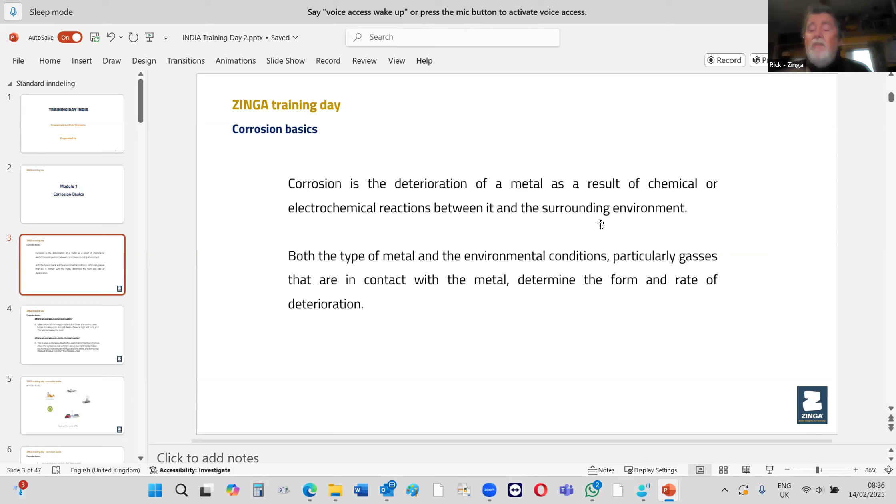That never changes. In the atmosphere, you have a lot of carbon dioxide, millions of tons. This carbon dioxide dissolves in your overnight condensation and in your rain. It makes carbonic acid, and this is what attacks your steel. So if it's not painted or galvanized with Zinga or galvanizing, it is going to corrode. When it's corroding, little molecules of metal are actually dissolving into the water, and that's assisted by the carbonation from the gases. So that's very basically what it is.

Another good example for you is chimneys. All over the world, you see chimneys, especially when you're making steel and so on. They produce sulfur smoke. When you have rain coming down and overnight condensation, sulfur smoke dissolves into that water and makes sulfuric acid. So that's also what eats your steel.

I had a guy phone me up a couple of years ago and he said, we have corrosion all over our bridge after only 12 years. Can Zinga work? I said, yes. He says, you don't understand. There was some paint damage from a truck. It took off the paint and it started corroding. I said, yeah, it's your salts. He says, no, we're more than 200 kilometers from the sea.

I said, you know the air you breathe? It's mostly nitrogen. Like sulfur and carbon dioxide, nitrogen dissolves in the rain or the condensation, and it produces nitric acid, which is a form of salts. So he was quite amazed, and I said, it doesn't matter where you are, you're going to have water and you're going to have salt forming, and the salt is going to attack your steelwork. It's as simple as that. And it's also two different steels, but we'll cover that as galvanic protection.

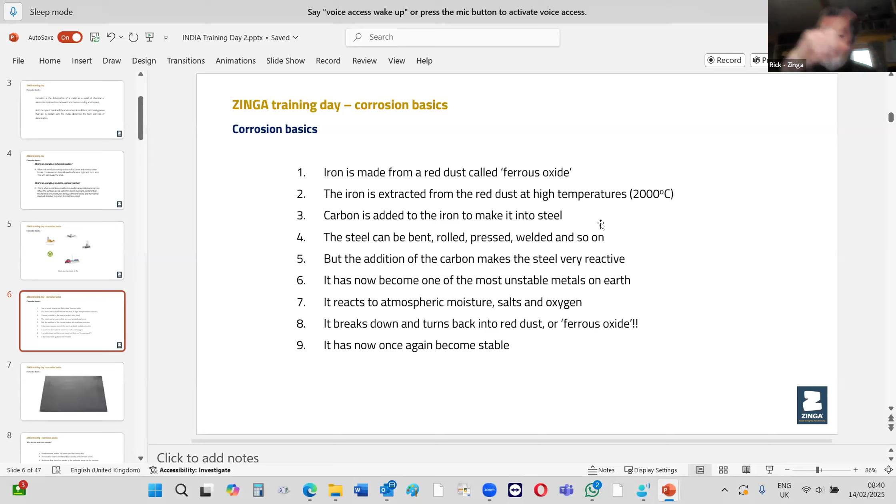So to break the cycle, that's why people put paint, or in our case, we put Zinga. And other guys put hot dip galvanizing. It breaks the circle of life of the steel and makes it last that much longer.

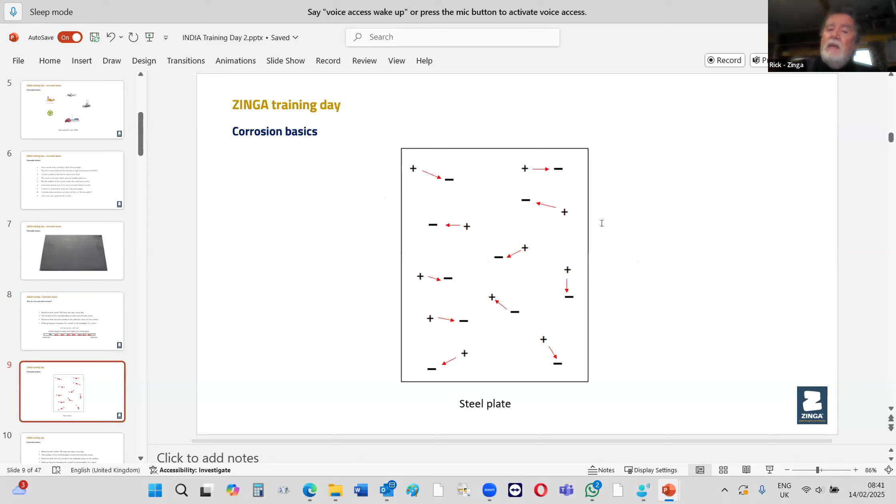So I'm just showing you here in a basic diagram. All your little electrical charges are flowing from the anodic area through the steel, and they stop. And this is how it looks. If you could see that steel plate through a special microscope, you would see these little charges. So all the plus signs is where your carbon is in the steel and in cast iron as well. A lot of carbon in that. And it's just flowing and stops.

Sorry, this will be repeated. So I'm just showing you that cycle in the steel. It's like if you have a battery to a light bulb, and you undo one of the wires, the light bulb will not come on because there's no circuit.

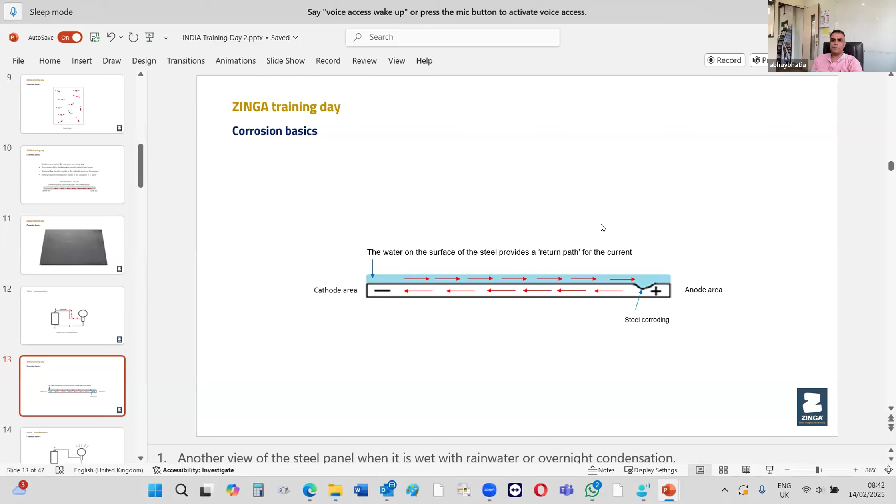As soon as you put water on steel, any water, like I said, rain, overnight condensation, now you have a circuit, because the electrons are going to flow from the positive area to the negative as normal. Then they're going to flow back to the positive through the water. And there's your circuit, and that's called a corrosion circuit. So this happens because the water acts like a return path for the current to flow, right?

Yes, exactly. So in scientific terms, the little charges going through the steel are just called electrons, but when they flow through the water, they're called ions, but it's still an electrical charge, and that is your corrosion cell. And this is what Zinga breaks, but we'll show you that in a sec.

So what happens when you see steel? Anywhere you have the positive area and the electrons are flowing away from it, it just starts to deplete and form pits. And you see little bits of pitting all over the steel surface as these little areas develop.

So when we put Zinga on, the top plate is showing you the steel as it is, just an empty steel plate. But see underneath, that gray color, that's the Zinga layer. And automatically, the current flows from the Zinga into the steel. So the entire Zinga area becomes active. That's a big layer of plus signs, positive.

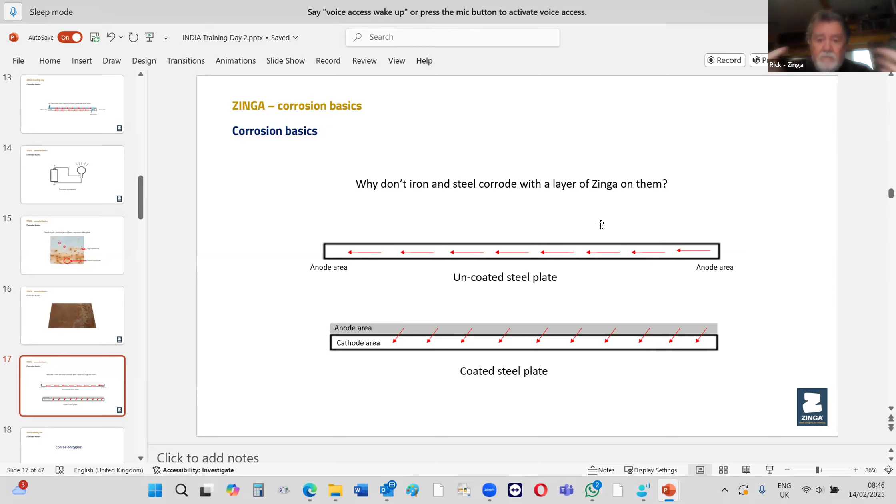And that's why the pitting goes deeper and deeper, which often you see on pipes, water pipes, pipes in oil refineries. When they start pitting, then you know it can be dangerous, because after a certain point, it's going to eat a hole right through the pipe, and then you've got oil, gas, water, whatever coming out. So pitting is the one you've got to keep an eye on.

Again, galvanic corrosion. That's literally how Zinga works, and hot dip galvanizing and so on. Whereas one metal will corrode in favor of the other metal because of all the electrons flowing out of it. Then you've got fretting, filiform, stress, and so on. But let me show you.

So this is the common one. And as I just showed you, you develop little rust spots all over the surface. And because it's general and the entire surface area is exposed, it'll all corrode evenly at the same time. So this is general corrosion.

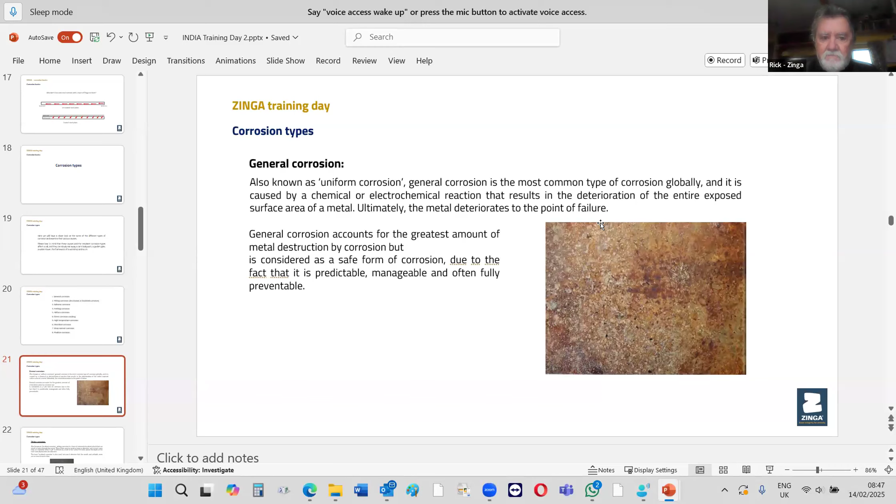With pitting corrosion or localized corrosion, like I said, this happens in a very small area. So your plus and minus signs are very close. So your circuit is very small and concentrated. So all the energy is going into that one area and it starts to dissolve the metal out.

And for example, you'll see often on pipelines, tanks and so on, if they've had damage or the paint has just broken down with age, because all paints break down, okay? There's no such thing as a perfect paint. The ultraviolet is the main culprit. Once ultraviolet starts hammering onto a paint system, you can normally tell when it's breaking down, because the first thing you see, it goes a little bit matte and so on. Then it starts to flake off back towards the primer and back towards the metal.

And what happens with pitting, the paint will break away in a small area, and that area is where all the water goes from your overnight condensation or whatever. And that's why that area starts pitting and it goes in very, very deep. And that's why we say on pipelines and so on, if you've only got small areas of pitting and the customer doesn't want to spend thousands and thousands of dollars, if you have a bristle blaster or something and just treat the area where the pitting is, brush on Zinga, that'll fix it for the next 10, 15, 20 years, depending on how thick the zinc is.

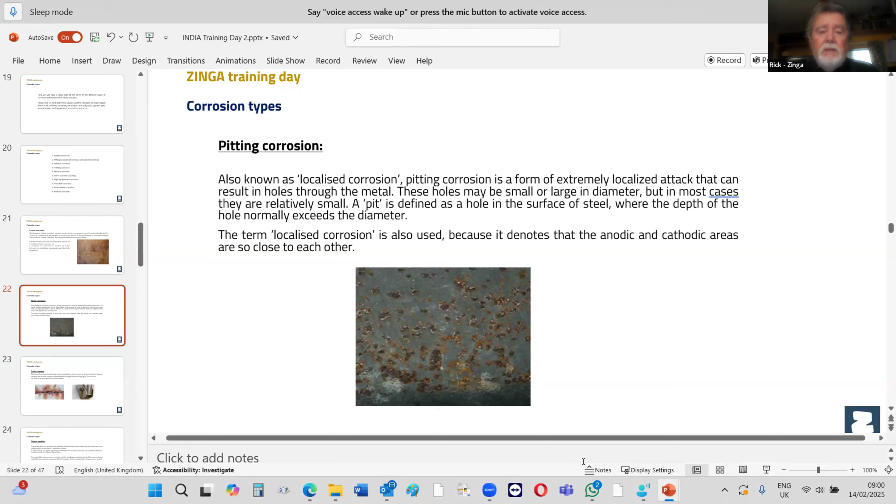Okay, that's pitting corrosion. This is another very common one, crevice corrosion. Anywhere you have bolted joints, two plates bolted together on a bridge or whatever, and even between the nut on bolted plates, anywhere you have two pieces of metal together, you're going to have water going in between the plates from rain, overnight condensation. This moisture is always there. It goes in between the two plates, and deeper down there's no oxygen, and believe it or not, that turns the moisture acidic, so your pH starts to drop.

And even if they're painted and it's old and starting to break down with age, that acidic water will go inside, start corroding, and it starts swelling up with rust. We've seen on transmission towers, which they make from angle iron, where it's actually buckled the angle iron. It's pushed it out so much, it's twisted the plate from the pressure of the rust. It's incredible. And of course, the bolts inside these bolted joints just rot through. You hit it with a hammer, the whole thing comes apart.

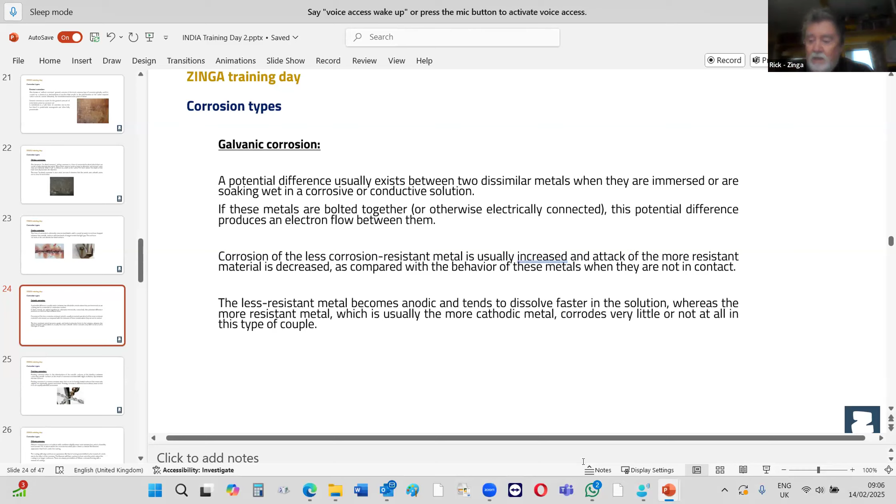And it's the same in boats. On boats under the water, they put zinc anodes or aluminium anodes, but you've got a stainless steel prop shaft to the propeller. The propeller is often made of brass or stainless or bronze. And I said to the guys, whether it's atmospheric or underwater, you must not have a metallic cocktail, as we call it. Because in a metallic cocktail, all the metals that are more active are going to dissolve and disappear. So you've got to have the same metals always on any job.

Filiform corrosion is not so common, but if you see it, this normally happens when you put on a very thin layer of paint, especially oil-based paints. In Africa, we use them to paint our window frames, doors, and all that. And it's normally an oil base. Even an unbroken coating of oil paint allows corrosion to form underneath, believe it or not. So filiform corrosion, that's a little telltale sign.

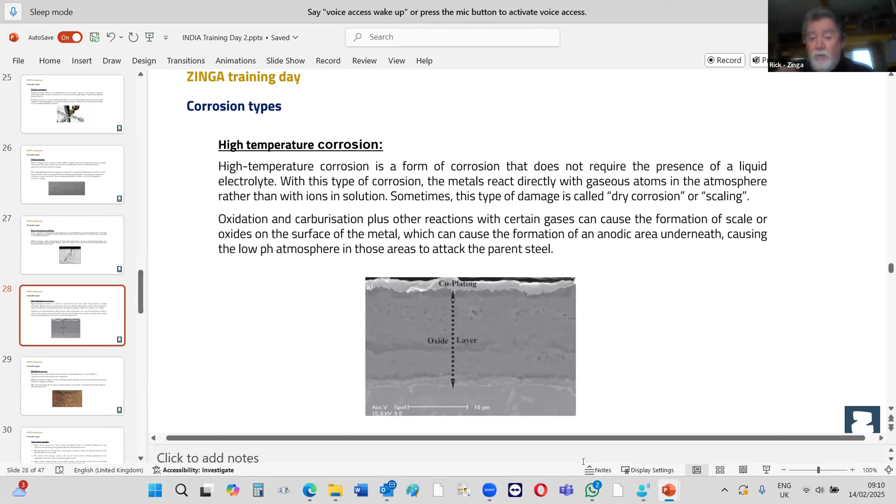You do have reactions where the atmosphere is normal, so carbon dioxide forming carbonic acid, but the heat also carbonizes a lot of fumes, and these go inside the metal, and then it starts to striate, it splits, and it starts peeling off. They call that scaling. So when we put Aqua Zinga on top and seal it all, it stops any reactions from moisture or from the gases taking place. So we have a solution for virtually all of these.

Microbial corrosion: the first big project we did was in Killybegs in 1999. They had 312 pier legs. It's the biggest pier in Ireland, and the ships come in and unload their fish on that pier, and these 312 legs support a concrete deck, and on that deck is a big fish processing factory. Ships from Russia and Finland come in every Friday, load up with fish and disappear.

So I was called in and they said, look, for this factory and these legs, we were told it's a 50-year design life. Each leg's wall thickness was 40 millimeters, and we x-rayed many legs, and it's down to 16 millimeters from 40 after only 20 years. So from 40 mm to 16 mm? Yeah, from 40 down to 16.

And I said to them, you see, the water is a bit shiny. He said, yes. I said, I think the fish factories may be putting some of their scraps in the water in the harbor. They said no, they assured us that they get rid of it biologically and use it for cattle feed. I said, you see that water? It looks like a kaleidoscope, greens and blues and purples. That's oil.

You are right, because you know how I made this quiz? I went on ChatGPT. I uploaded a PDF. I said, give me a challenging multi-choice question using this data sheet. I just copied what is there. Good one, good one. Okay. So good. So 6 questions. Now, Rick, do you want to review what questions we asked and give them the answers? Sorry, Abhay? So you want to just see what questions we asked.

We asked them what is the primary function of Zinga, and there were 4 options. And the answer is B, obviously, cathodic protection. Next question is what is the zinc content in the dry film? The answer is above 96% ideally. It's usually more than 96. Third was a little tricky. Which standard does Zinga conform to for zinc purity? So we got some answers as 14001. But the actual answer is ASTM A780, right?

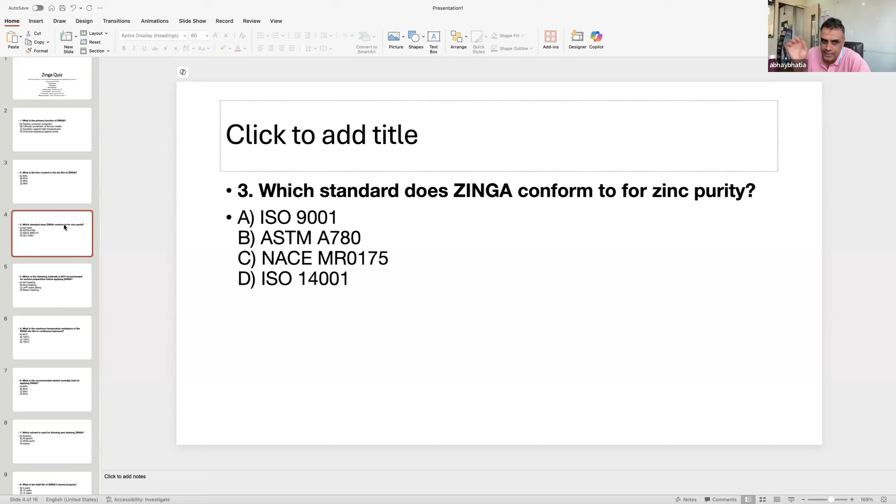Yeah, because this gets very confusing, because we are having some ISO standards, so they confuse 14001 with 12944. 12944 is the corrosion area standard. It's not related to zinc purity. Zinc purity is ASTM A780. Fourth is, okay, Rick, you want to talk about this one a bit, which of the following methods is not recommended for surface preparation before applying?

Yeah, shot blasting. Yes. And why is it not recommended? There's a couple of reasons. With shot blasting, many automatic machines use metallic shot, which is round, like the buckshot from a shotgun. So they should look like small ball bearings. And shot blasting is okay for breaking mill scale and stuff off new metal because it shatters it, and it stops it from coming loose after a year or so once it's removed.

But shot blasting gives you a surface like a golf ball. So instead of being sharp, jagged peaks where the coating can grip, it's all smooth. So it has no lateral support at all, and your adhesion is very low. So your pull-off strength is also very, very low. So we never ever put anything over a shot blasted surface. It's very bad. Got it.

Then one question we asked was: what is the maximum temperature resistance of Zinga dry film in continuous exposure? So it's actually 120 degrees with spikes of 150, right? That's correct. Just so you know, when they decontaminate nuclear steelwork that's been coated with Zinga, they use superheated steam at 150 centigrade on the jets to decontaminate the Zinga surface. So, yeah. Great.

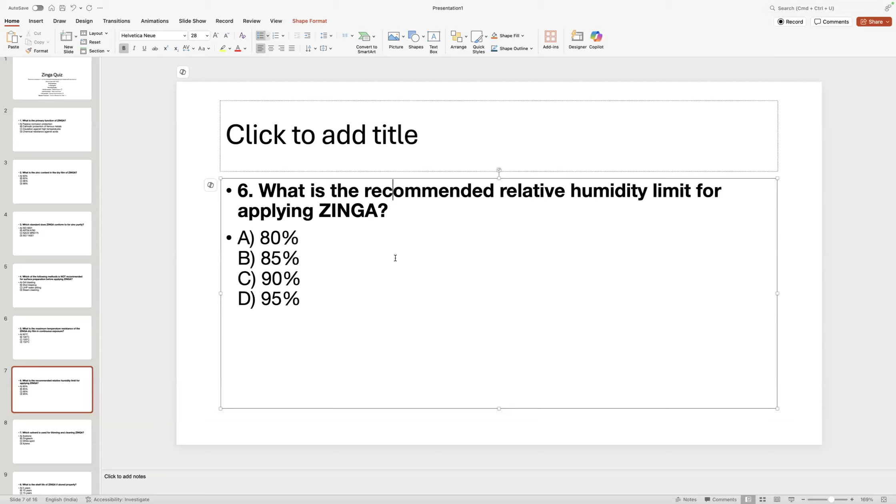And then I asked one more question where Nehul pointed out what the question should be: what is the maximum relative humidity limit for applying Zinga? And Nehul, what was your answer for this? 95%. 95. Yeah, so is that correct, Rick? It is indeed, yeah. So good.

So this is part one of the session. Now, Rick, over to you. I think you have finished the types of corrosion so far, right? Yeah, there's a couple left, but if you've seen enough about corrosion, we can go on to the metal preparation. Yeah, let's do the metal preparation.

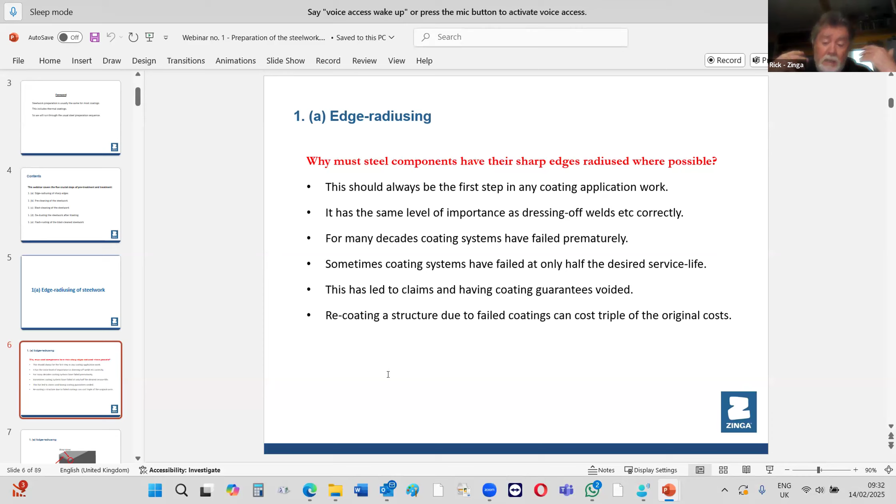It's the same importance also for dressing off welds with weld spatter and so on. So all these coating systems have failed prematurely, and many have only failed at half. So if we said this is a 40-year life and they don't do the preparation correctly, at 20 years it fails. And then there's big costs involved, and recoating will be triple the cost.

Then just take an angle grinder with a sanding disc. Not a grinding disc, that makes a mess. You just take a sanding disc, something like a 40 grit or a 36 grit disc, run it along the sharp edge, down that edge, down that edge. It takes literally 20 seconds, and you have a nice radius. Internationally, they look at 2 millimeters or 3 millimeters. 2 millimeters is fine. So on a cut edge, you still treat that before you do any blasting or pre-cleaning.

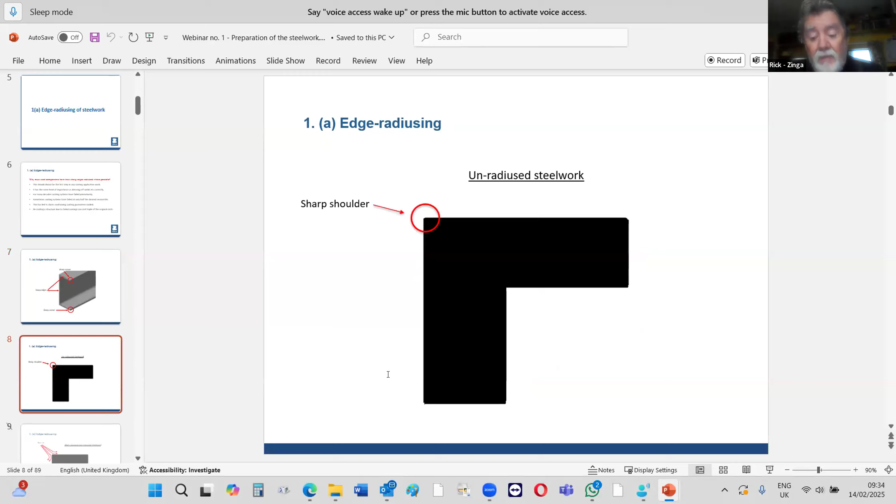That's vital. So this is just to show you, that's the sharp shoulder, and that's where the coating will pull back on either side of that sharp edge. And again, that's natural, that's the laws of physics with materials. And also when you're trying to blast it, you can split the blast. So you might have an area that's slightly smoother along the edge of the beam, which you don't want.

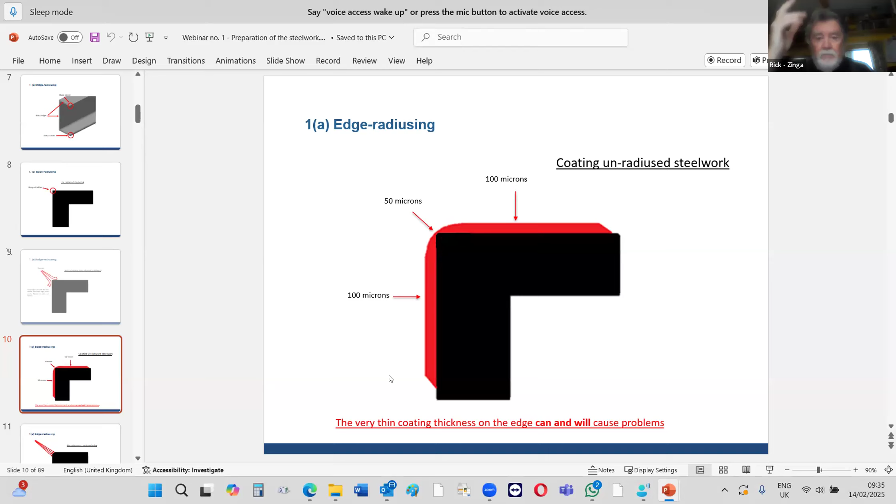So you can see here what happens. The coatings pull back, and it's roughly 50 to 60 microns maximum you'll get on a sharp edge. And that area will break down very quick from UV. And in the case of Zinga, if there's any other influences around, any adjacent metals, that thin area can deplete quicker than the rest. So the 100 microns might give you a good 30 years, depending on where you are. But the edge, you probably only get 15, 20 years, and then you're going to have to redo it.

So, Rick, this is a very true case. We are doing heavy fabrication. We have seen that on channels and angles at the edges always, because they are using spray paint. The coating does not flow enough, it does not disperse enough. And if it's going to be sharp, it will never be uniform. So some radiusing is always preferred, and applying with a brush is recommended at the corners.

Yeah, absolutely. So that's opening up the edge now. It's much easier to profile a radiused edge. It's very easy, in fact. And coating as well, it makes a big difference. If you have a radiused edge, then your coating thickness is consistent around the entire edge. And on big projects, when you're coating beams, especially at height, access is expensive. You've got to put up scaffolding, or use a hydraulic lifter to go up. And the repairs often can cost 3 times as much.

So we said to the guys, rather get it right first time, and you won't have any problems, instead of throwing away thousands and thousands of rupees because you've got to go back and redo. So it's these simple things, but they're critical. And as long as you respect that sequence, you'll never, ever have a problem.

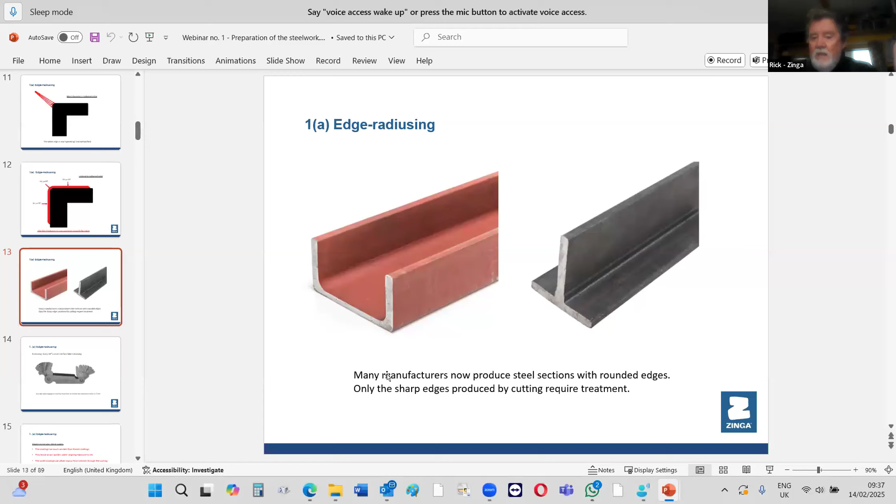Now, this is showing you a different steel supplier, and you can see it's already pre-radiused when you buy it. So there's a channel iron and there's a T section, and they're ready to be blast cleaned and put Zinga on, and they're perfect. They don't need anything, apart from the cut ends where you just give it a quick dressing off. Takes 30 seconds and away you go.

No problem. It's so critical, inspectors even have this radius gauge, and they can check it. If it doesn't fit, they'll call you back and say you must take your sanding disc and go over it again to get the radius correct.

I want to interrupt one. See, Ranjit, your company does blasting and painting, so you all must be aware that you have to prepare the surface like this. Others in other regions, when you are selecting an applicator, you should ask him questions like this: suppose there is a sharp edge, how are you going to coat it? How do you measure the radius? Does he have these instruments? And once he's talking this language, then you know that he knows about surface preparation and he'll do a good job. Yeah, over to you, Rick.

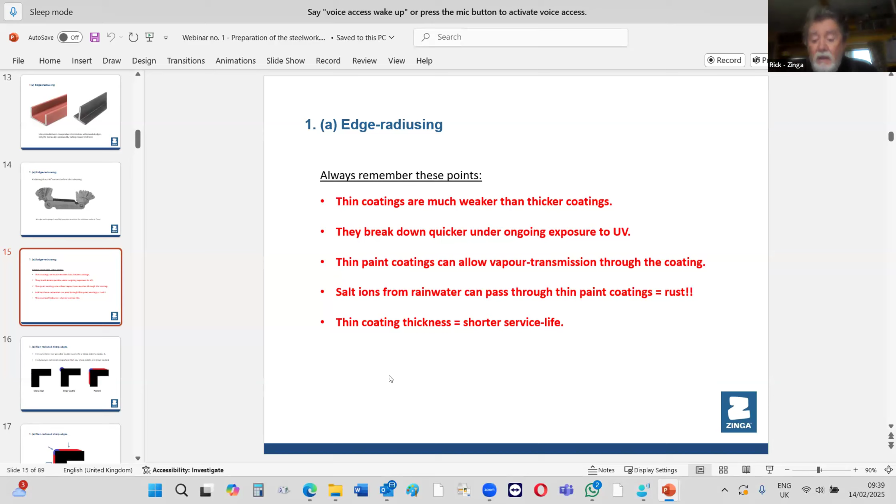And the same for rainwater. If you have salt, again, as we said earlier, salt ion. So you have electrons flowing through the steel and ions flowing through the water. They're both an electrical charge, but they have different names. So yeah, a thin coating will definitely give you a much shorter service life.

Okay, there are sometimes situations where it's impossible to get in. We have guys that have been called in to refurbish parts of a refinery or a big sugar processing plant, and the beams are very hard to access. I said, okay, do your best on the sharp edge. If you can blast along one side of the edge, and then blast along the other side of the edge, and then stripe coat it with a brush, and build it up.

Okay, after you've done all your work, you've got your pre-cleaning. I think we cover the pre-cleaning. It's also with welding. If you've done any welding, you will have weld spatter, all those little spots on there. And we say, don't grind them off. Again, use a sanding disc with 36 grit, 40 grit. When you go over it, it cuts off all your weld spatter, leaves it nice and smooth, ready for blasting.

And again, pre-cleaning is a vital stage, because no coating will stick to oil or grease. There's no coating in the world that will stick to that. And you have many sources. You have steel work that comes from a machine shop. So all the bending and cutting, some of them use that white water-based oil, but it's still oil. Drilling machines as well. So any operations that are using cutting, welding, drilling, whatever, there is going to be oil from the machines. You have oil from the gloves.

I've worked in more than 22 countries and I've never seen clean gloves, ever. They're always covered with stuff. You're always handling everything in the workshop. So you will have oil on your gloves, always. And the fork truck, when they're lifting heavy steel, the fork truck tines also get oil on. Normally not much, but there could be enough. When they go underneath, they're sliding, rubbing oil into it as they go underneath to lift the metal. So fork truck tines also can have it.

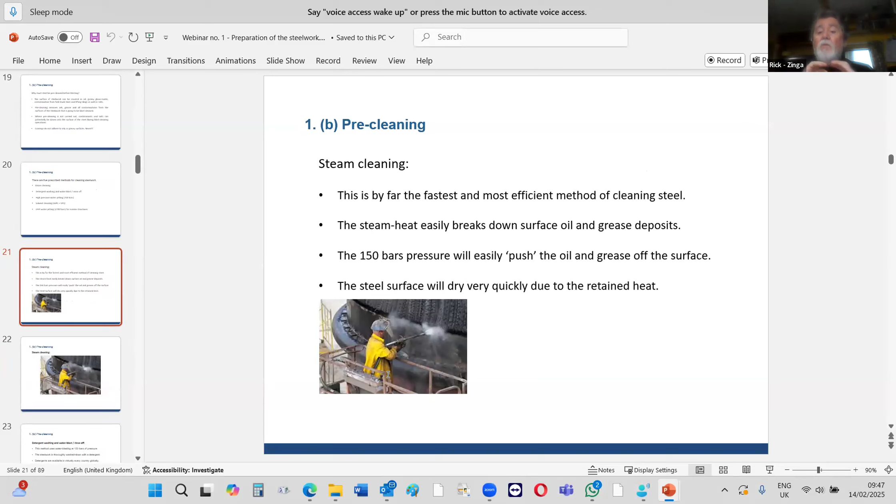This is just to show you that that's a guy standing there, steam cleaning the bottom of a big, huge machine. And you can see to try and hand wash that with detergent, that's a big job. So again, it's not a clever thing to try and do by hand. It's 150 bars. We say 140 to 150, 160 bars, anywhere there, minimum. And that will push off all the oil and grease once it's been softened by the steam heat.

The detergent, again, you wash down the steelwork with detergent, and they're available in every country. The detergents break up oil and grease, and it floats to the surface of the water. So while you're jetting, it's coming away from the steel surface.

And again, if you put in some bleach, that actually has two advantages, believe it or not. When you put bleach in, it still breaks up all the oil and the mess, takes it off the steel, and then you rinse it off. If there's any residue left behind, it's high pH. And believe it or not, it can leave a micro residue on the surface. So that actually stops anything from rusting for two or three hours. So there is an advantage to having the bleach in your detergent if you're going to hold up on site.

And again, all the oil is removed by pressure from the water jetting. That's showing you there how he's doing a rinse off. This is 700 bar. If you're working near the coast or in harbors and so on, this will remove chlorides.

So in many countries where they don't have access to Chlor Rid or HoldBlast, these desalting chemicals, we had a big project in Pakistan at the harbor, and they had a lot of oil and grease. And we said to them, use high pressure water jetting. And they said, there is one available on the shipyard. I said, well, just borrow it and do that. And they said, will it work? I said, it's just jetting. Yeah, it's the pressure.

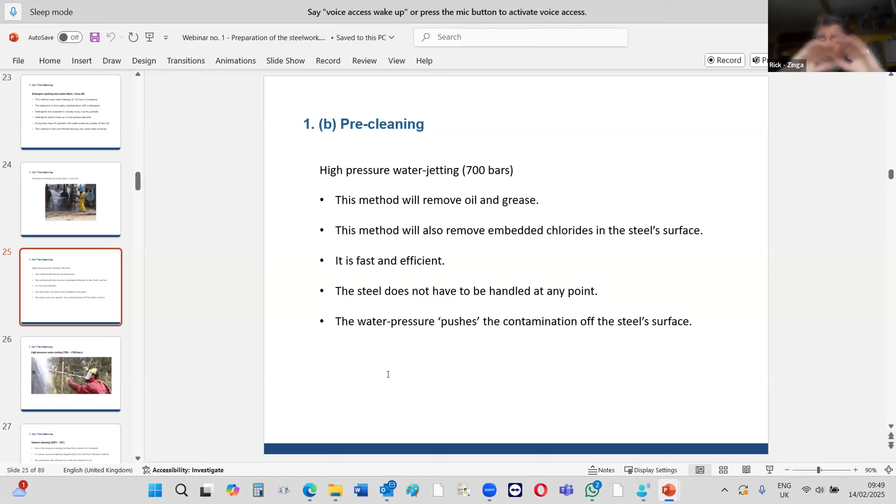It's the pressure. The energy from the water hitting that steel at 700 bar or above actually heats up the metal by about 3 degrees centigrade. And the metal, microscopically, actually opens up, and the water is forcing out all the salt, all the chlorides. So you won't have any contamination on the steel at 700 bar.

So that's how it looks, the special nozzle. And you have to always wear gloves. Although the only dangerous part is the first 100, 120 millimeters. After that, there's no danger from the pressure at all.

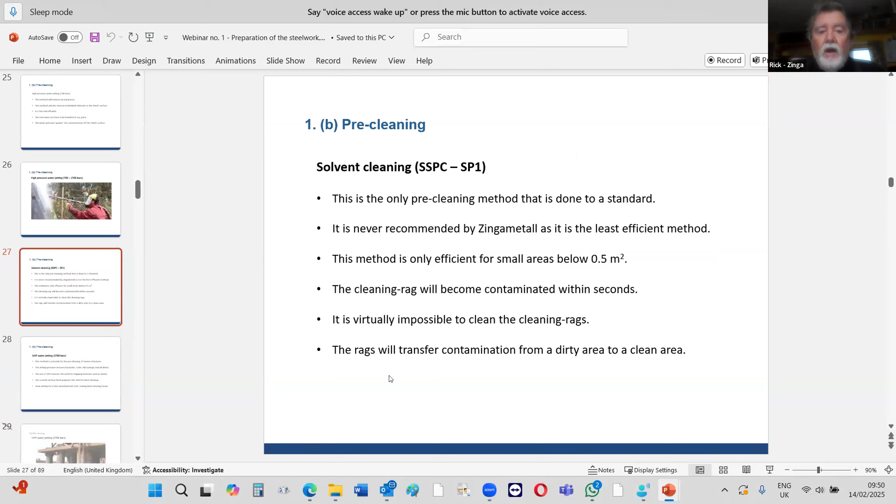Solvent cleaning. This is the only one that is done to a standard, SSPC-SP1. And if you guys ever want a copy of this, we're not meant to send it to you electronically, but if you need a copy, we can send you one on the quiet, just so you have a good understanding of what's involved.

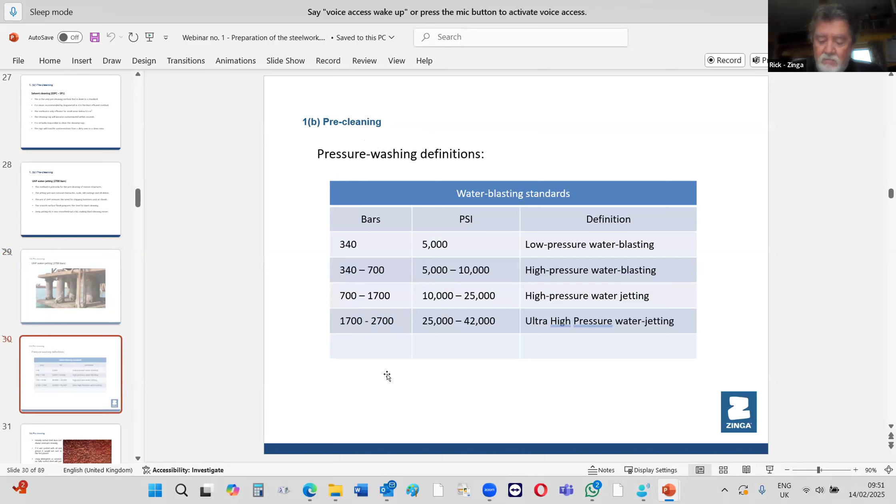These are just your different definitions. This is international, so when someone says they want to use high pressure, they must understand high pressure water blasting is minimum 340 bar. So a lot of guys think 5,000 PSI is high. We said, no, it's not. That's actually low pressure.

Rust is also slightly porous. So anything you put on there is going to be absorbed in and make it even worse. So I said, if you're going to do your blasting, rather go straight in on that and just blast clean it. It'll come away and make a little bit of rust dust, but underneath, that metal will be shiny and clean. There'll be no staining. So rather go straight in blasting. Don't do pre-cleaning on rust. It's very, very bad.

What I was saying earlier with ExxonMobil in Malaysia, they have this rust. And they said we have many areas that are going to be blast cleaned in 5 years' time. That's our shutdown, it's planned, it's budgeted. So every few years we have these major shutdowns for 2 weeks. He says, but the rust cannot advance and get more pitting. And that's why we designed the frontline maintenance on that sort of surface.

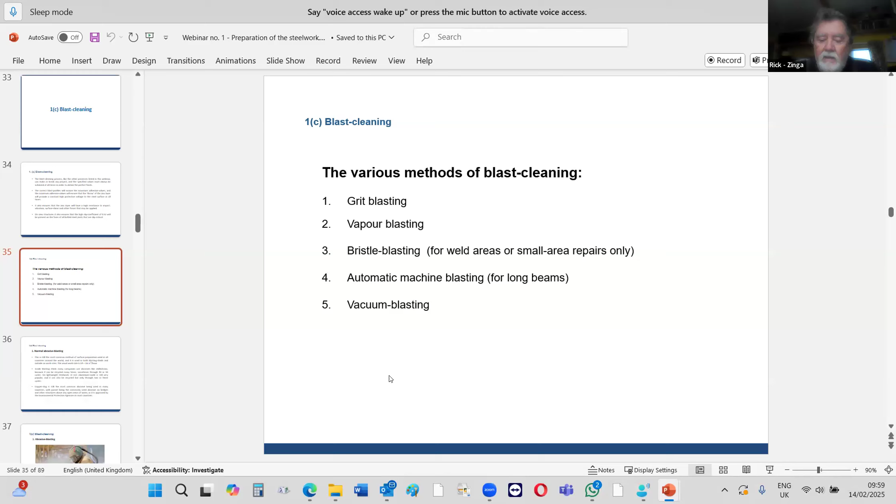So you have different types of blasting. Obviously, the oldest is grit blasting, which is with a dry grit. So this is normal abrasive blasting. You can prepare the steel at 14 to 16 square meters an hour. Inside steel sheds where they recycle the abrasives, then we recommend to use chilled iron.

We've had some companies saying, "Oh, chilled iron, if we use normal black slag, it's 100 euros a ton, for example, and chilled iron is 450 euros a ton." I said, okay, according to the new laws, all blasting slag that's been used is now classified as toxic. So you buy 50 tons a month of slag. When it's used, you then have to bring in the truck to take it away. You're paying for 50 tons to be taken and dumped in the landfill every month. So there's your costs already going up, okay?

When you buy the chilled iron, you can reuse it and reuse it and reuse it, and as I say here, 40, 50 cycles. And each time it hits something, bits break off. But those bits are sharp, so they still have cutting power. So you can recycle and recycle. And if you have a measuring gauge, you simply measure your depth, which you do anyway, before you apply the Zinga. And when you see your profiles are getting shallower, you simply buy a couple of bags and you add it into your pot, okay?

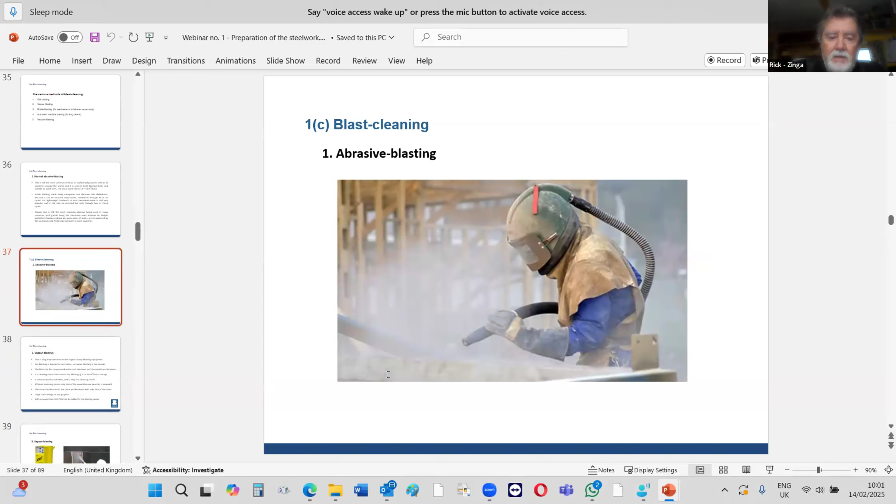So you avoid all these costs of trucks coming every week, taking away all your stuff. The guys who argued, when we showed them this, they actually phoned us after 1 year and they said that we've saved them 4,500 euros in the first year by using chilled iron. Obviously on site you can't, because you'd lose it. You can't recycle it. There you have to use copper slag or garnet or whatever. So this is the abrasive blasting that's been around over 120 years.

Vapor blasting. This is only a few years old now, and more than 25 years ago, they had slurry blasting, which is a similar concept to vapor blasting. So when you were slurry blasting, your blast pot was full of your abrasive, and instead of having compressed air like normal blasting, you had compressed water. So when you pulled the trigger, the water came out with the grit, and there was no dust. But that system was using 20 liters of water a minute, which is a lot of water. And in many countries, they don't have such a supply of water.

Then this very clever man introduced vapor blasting. Vapor blasting is a similar concept. You still have your blast pot with water inside and your abrasive, but on this system, you only require about 15% of the water needed in the old systems. And more importantly, you only require maximum 35% of the abrasives.

And we had a job recently where a guy was going to do a bridge, and we said to him, you should vapor blast this job. He said, we have the normal blasting pots. I said, how much are you going to use on this bridge? He said, about 150 tons of abrasive. And I said, you got the contract? He said, yes, we were awarded it last week. I said, okay.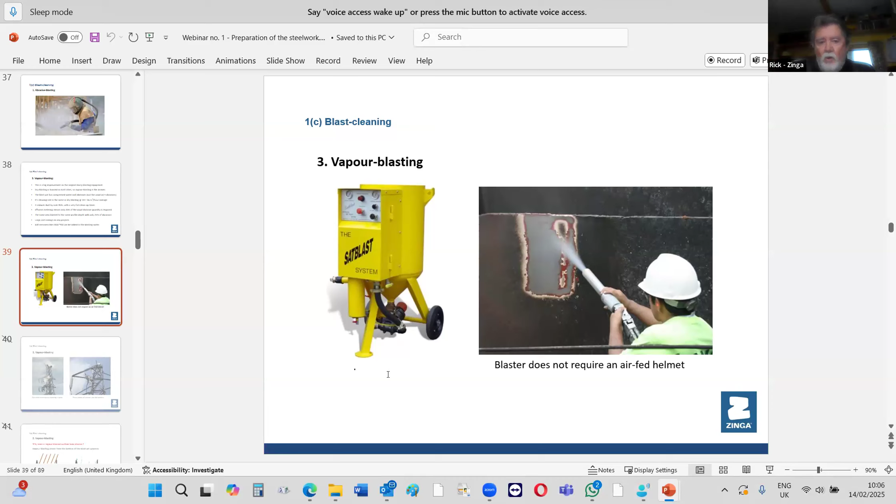And there's also no dust drifting into neighboring yards or projects or car parks. There's no dust drift. It all just drops straight down. So housekeeping on site is very, very simple. It's a quick cleanup. 20 minutes, the guys are off site. It's very, very fast.

This is vapor blasting at height, just to give you an idea. So these are guys doing towers. Bijoy, this is for you. Bijoy, you are always finding some challenge in doing towers, right? So this is a good method of doing it. Yeah. What about the flash rusting after the vapor blasting? Sorry, Bijoy? Once we clean with the vapor blasting, moisture content will be there, no? Because of the moisture, flash rust will come.

This guy you can see on the right hand side here, he's got a one-handed blasting jet. Normal blasting on the ground, you have a dead man's handle, so one holds and one pushes the trigger. This one was imported from California for this job, and we did some trials in the UK. Because international law says when you're working on towers, you must retain 3 points of contact.

So both feet... Rick, his question is that when I do a vapor blast, the surface is wet, and it is always recommended that you apply the coating on a dry surface. So doesn't this create a problem? What we found in most countries is that the surface dries off in 3 or 4 minutes. So it's never an issue. Very less water, more of vapor, which is doing it. So that's why the drying time is faster, right? Yeah, exactly.

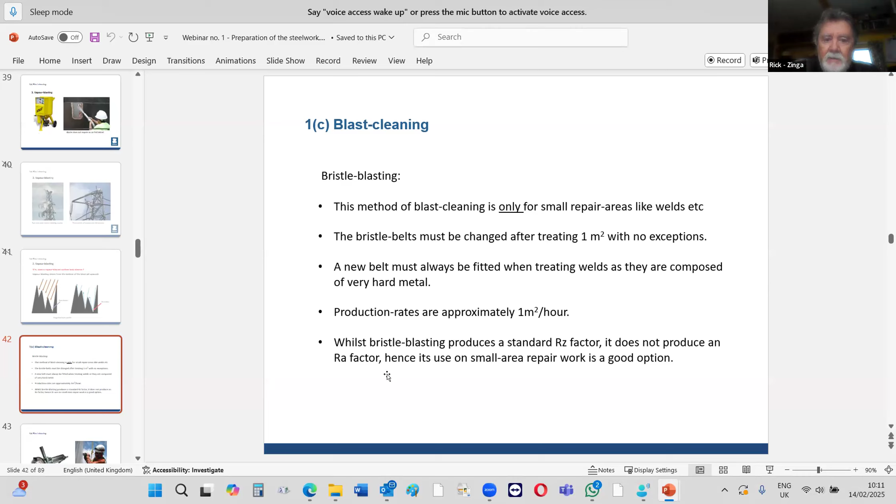And the guy said, well, it is very expensive. And it is very expensive. Yeah, the belts. You have to change it after 1 square meter. So if you're doing 10 square meters, that's 10 belts, and that's about 300 euros. So you'd rather get a guy in with a blaster and give it a quick sweep blast. It's still cheaper than bristle blasting, but it is for small areas and treating welds and critical areas.

Okay, automatic blasting. This is where you have these machines, you're putting through big beams. We did railway tracks that are 18 meters long, and the blasting rate was 1.2 meters a minute. So to blast 2 rail tracks was taking on average about 30 minutes. But it's much faster and far more accurate than having to hand blast. I know in some countries they still hand blast, but it's a long process. This is much quicker and much neater.

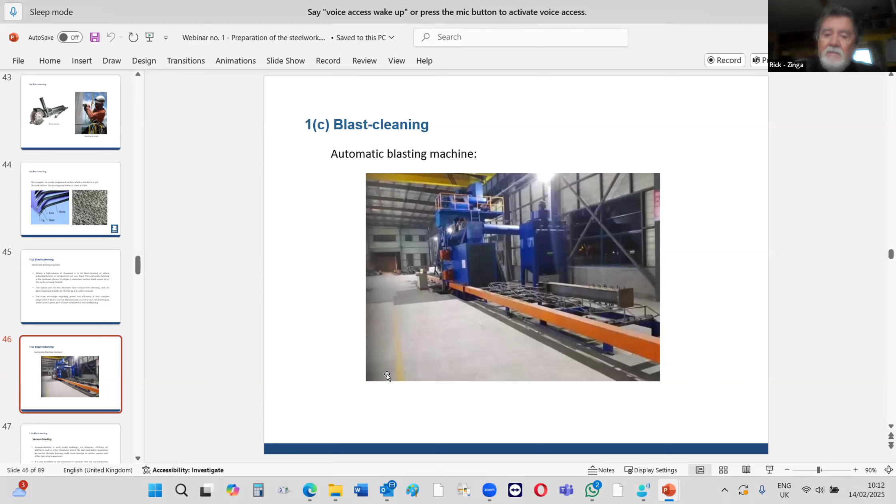Vacuum blasting again, 1 square meter an hour, like bristle blasting. But this is for inside food factories, pharmaceutical places where they need to have the area galvanized with Zinga because coatings keep failing. And we said, okay, you go in with a vacuum blast, there's no mess, no dust, you get a good profile. And again, they apply Zinga with a brush, or first coat brush, second coat roller, and it comes as smooth as a sprayed finish from a spray gun.

It looks really neat. So we can offer solutions for anything in any project, literally. So we don't only give answers. When they have a problem, we will give a solution to anything like that.

Sweep blasting. Again, if you're using Zinga on hot dip galvanizing, it's 2 things. We do lots of repairs on galvanizing worldwide. So sweep blasting is a set technique. You hold your nozzle at 45 degrees, not 90 degrees like normal blasting. It's 45 degrees. And instead of blasting at 6 bars, you blast at 3 bars at that shallow angle.

So when you're sweeping, it's breaking up the hot dip galv and removing any loose flaky bits. It's removing little bits of zinc off the surface and making it rough, but it's not removing the thickness of the hot dip galv. You want to retain that. And this is actually a standard in Australia and New Zealand now, this method. So it's not only for repairing hot dip galv.

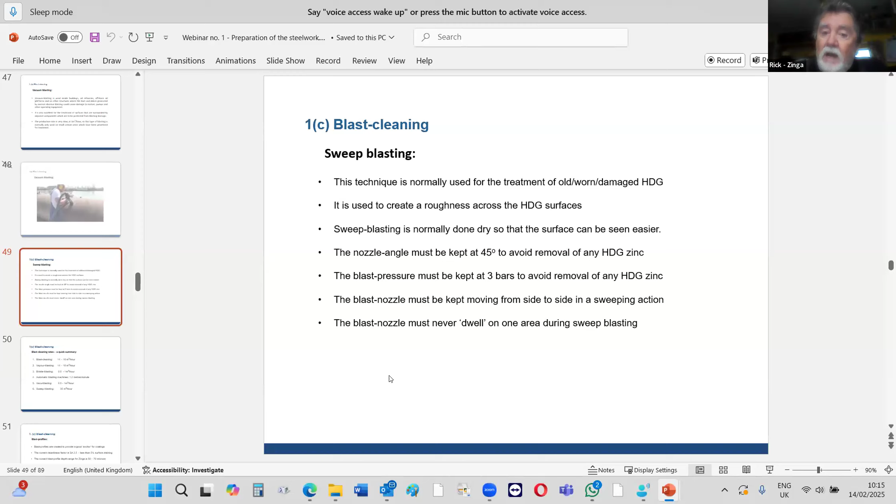Rick, I have a question. In India, many of the hot dip galvanizers, they overcoat with aluminum paints for periodic maintenance. Yeah, aluminum paints. What, to have the nice finish? Yeah. If we want to do the Zinga application, what is the procedure for that? Is it required to remove the aluminum coating from the galvanized surface?

But what some guys do is, if they want it to look like galvanizing, then they apply Zingalu instead of Zinga. So if they want to build up galvanizing on a large area, we recommend they use Zingalu from the tin, not aerosol. So you put it on with a gun and you can build up a heavy layer very fast. And when it dries, if you stand back, it often looks very, very similar to a hot dip galvanizing finish.

Okay, how to repair the existing? These are the existing poles, light poles, and other kinds of things, which were hot dip galvanized around 10 years back, and every 3 years in their routine maintenance they do the aluminum paint on top. What if they want a 10-year warranty? I very much doubt anybody would warranty that, aluminium paint. Okay.

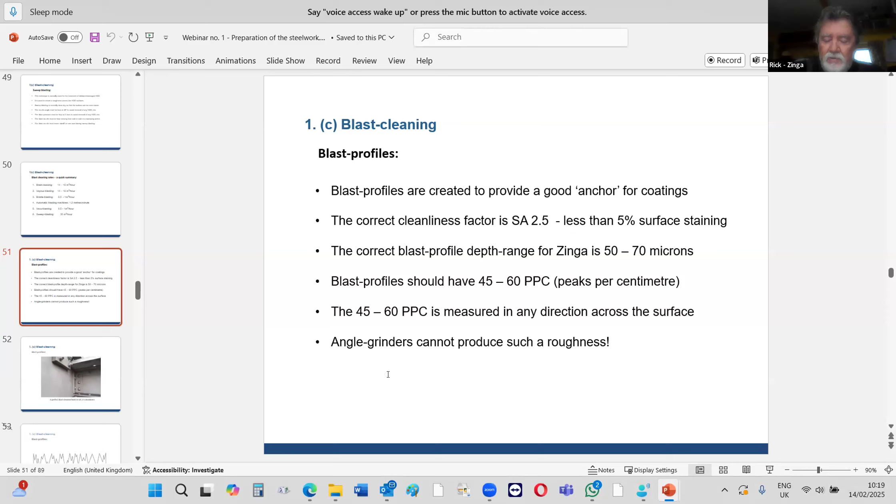So if you coated that with Zinga and came back after a week and measured it, it would be around 6.5 megapascal to pull the zinc off. After 3-4 months, it'll be an absolute minimum of 9 megapascal. After 10-11 months, it'll be minimum 11 megapascal. As the zinc reacts with carbon dioxide and atmospheric moisture, condensation, it's actually getting stronger, so when you try to pull it, it gets tougher and tougher onto the metal.

And the blast profile is the main anchor. So it's going inside, right inside that profile and giving you your grip. And that's why if you have a blow from the side, like on crash barriers and bridge supports, if it's hit, it can shear off some of the zinc. If you've got 15 tons of lorry, you won't stop that from damaging the zinc layer, but it'll rub it across the top, but inside you still have Zinga. So if you go the next day or so, the next week, and put it on with a brush, it'll adhere to the existing zinc and it'll rebuild again. So that's a very key factor.

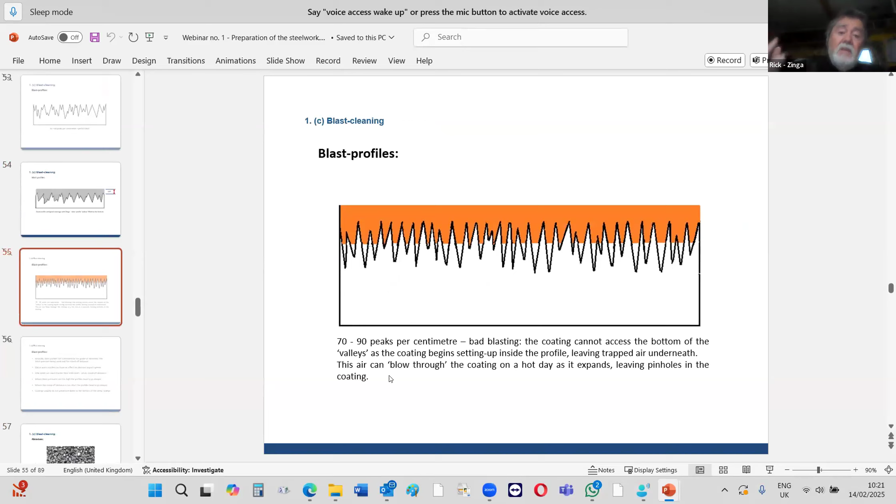And that's what happens if you have, say, 70 to 90 peaks a centimeter. They're so narrow, the coating goes halfway down and it starts drying and it stops. It won't flow right down to the very bottom. This is why the peaks are so important. But the blast profile does that for you. Automatically, it controls the peaks. So you won't have that issue at all.

And it says here, for MIG welds, when you're blasting MIG welds, you must hold your blast nozzle a bit closer, because those welds are full of manganese, so they're extremely hard. So you have to blast it a bit more slowly, or hold your blast nozzle a bit closer. So this is just to achieve the correct blast profiles. But you can read about this.

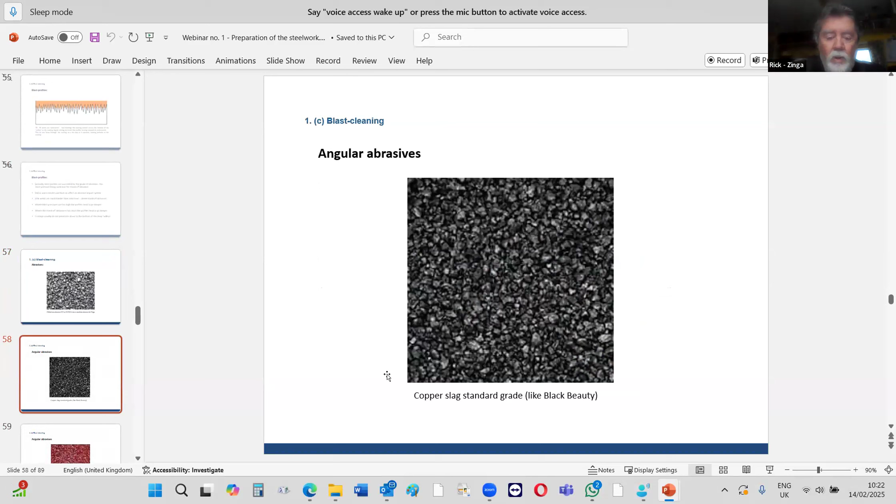There's your chilled iron, which to me is number one in the world. There's copper slag, which is used all over the world, in every single country. Many thousands of tons a week. Garnet: the biggest mines are in India and in Australia. Because the supplies are running slow, there's big fights, because worldwide, jewelers use garnet for making rings and necklaces. They say we're a curse on their business, because we shatter it against metal and it makes dust, and they make beautiful ornaments and jewelry using garnet.

The trouble is, garnet is harder than slag. Slag is 6.5 Mohs. Garnet is over 7 Mohs. And to give you an idea, diamond is 10, which is the hardest in the world. So garnet is still in big demand. A lot of people still use it, but in Europe it's very expensive now. It's more than double, 3 times the price of slag. But some guys swear by it, and they won't change.

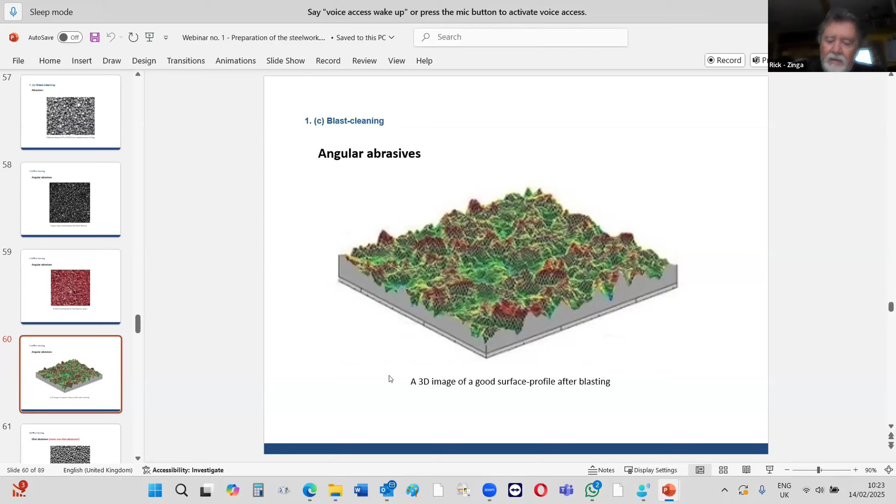This is a big no-no, as Abe was showing you on his quiz. This is why you never ever use shot blasting. Because that's what happens: it's rounded off. You have no lateral support. So if something hit that surface, it's going to rip off all the zinc, because there's nothing to anchor it deep inside the metal. It's just like a golf ball almost, very, very smooth. And there's a 3D image from a computer. There's no deep valleys. If you look around the outside edges, they're all round and scalloped. There's no deep V's. So that's very, very bad.

These are just your cleanliness standards that we work to. Again, you can go through these at your leisure when Abe sends you a copy, and please, if you have any queries on these, let us know.

This is another thing you might find interesting. It's not always important, but it's always good to know for background. All steel is graded. So this one is grade A. Okay, it's got a few marks on it, but it's been lying in a factory. So there's bits of cement dust, but that bluey gray color, that's actually brand new steel. Okay, but it's been lying in someone's factory for a couple of months.

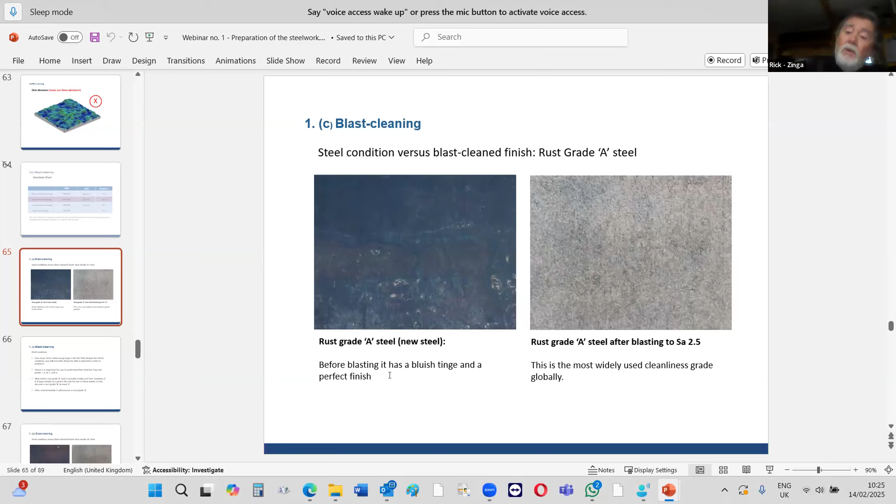And that's how it looks after it's been blast cleaned. So that's a rust grade A. So if a specification said you must blast the steel to SA 2.5A, then you know you're dealing with brand new steel. If the steel is older, this is explaining your conditions A, B, C, and D. Rust A is new. After a few weeks, it could be a rust grade B or C. And after several months, normally at the coast, it becomes rust grade D. So it's very badly rusted.

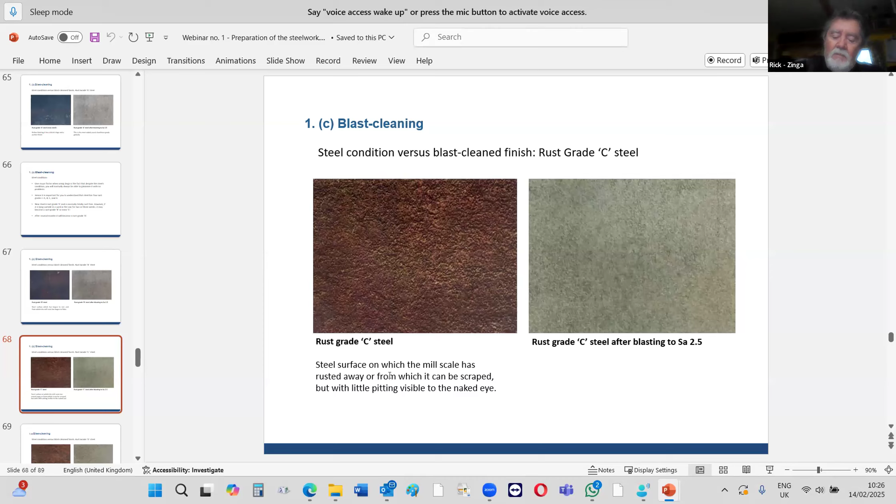So this is a rust grade B. You can see it's got some pitting on the surface because it's been lying around a while. But after blast cleaning, it looks okay. That's perfect for Zinga. Absolutely perfect. Rust grade C, that's been lying around a lot longer. And you can see on the left-hand side that the corrosion is much deeper. But once again, after blast cleaning, and this is using copper slag, it still looks perfect for Zinga. Absolutely perfect.

And this is the worst situation. You can see here, the rusting is very, very bad, very deep. And even after blasting, you can see it's very lumpy looking. But even over a grade D of steel, if you put Zinga on that, it's still going to last you 25 to 35 years near the coast. It'll still give you that durability. So there's no changes at all.

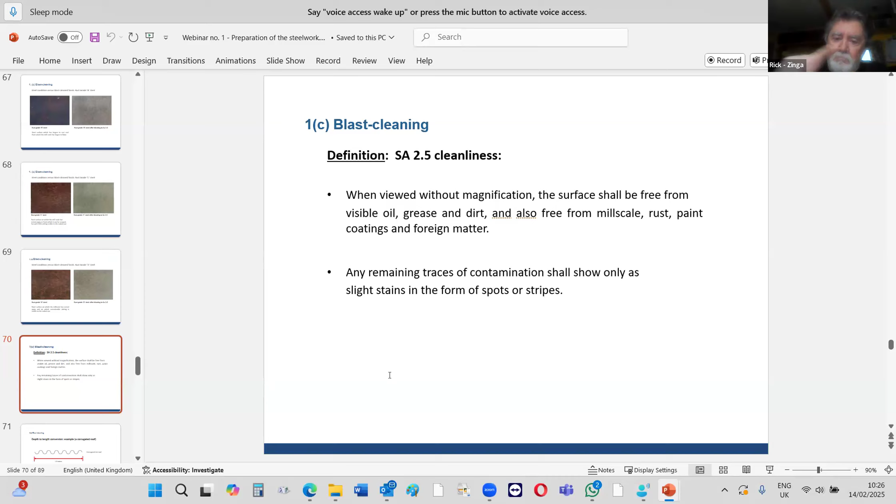And this is the definition according to the standard. It should be completely free from oil, grease, dirt, mill scale, rust, all paint debris, and any foreign matter. So even if it's badly pitted, it still conforms to this. So there's not a problem at all.

This is the depth to length conversion. Again, this is one of the critical areas of a blast profile, but many people didn't realize. So for example, you have a corrugated tin roof. That's what I have in my office. And you can't beat African style. It's still very waterproof for many, many years. So if you take a sheet of corrugated iron, sorry, that's actually the wrong thing there. That's actually 1 meter, I beg your pardon. I don't know why it's got 1.6. When you get a 1 meter wide sheet of corrugated iron, if you pull it straight out, it becomes 1.6 meters in width.

When you take a blast profile, again 1 meter long, and you blast clean with slag to 60 microns, if you could pull that straight, it actually comes out to 2.68 meters. So, for example, if you have a square panel of steel, 1 meter by 1 meter, and you blast clean it, when you coat it, you are not coating 1 square meter of steel. You're actually coating 7.18 square meters. So the zinc is actually sticking to 7 square meters. And this is why when you try to pull it off, it's physically impossible.

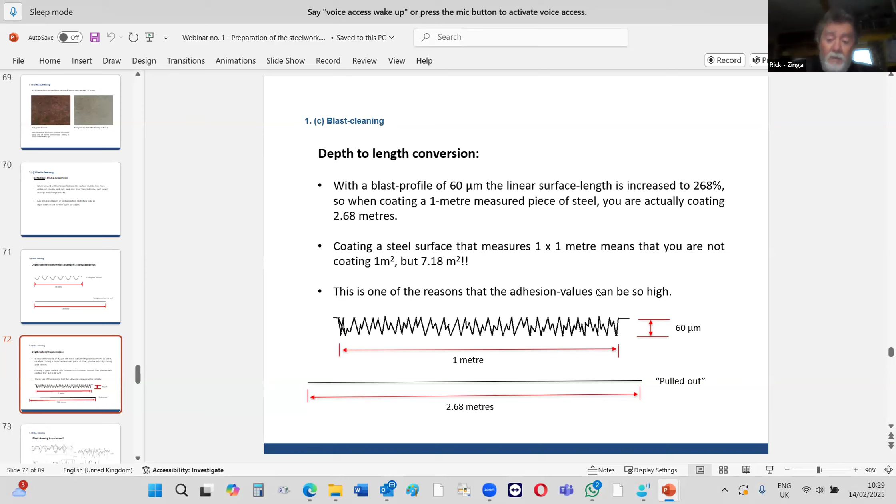And we said, do you have a bigger hammer? Have you got a 5 kilogram hammer? Do you have a 10 kilogram sledgehammer? We will beat the steel so badly, the whole panel will be buckled, but the zinc will still be on. It won't come off. That is the strength of the adhesion. And we've done the hammer test a few times. It makes people laugh, but my God, the guys' eyes, when they see all that beating, it won't come off.

And this is just to show you some of the things that you work with in the laboratories. So blast cleaning is in fact an advanced science. It really is. So we just show the basics to comply with the standards, because that's all you really need to know. So that's pre-cleaning and blast cleaning. Okay, now we have dedusting. Again, this is part of the 5-point sequence.

After blast cleaning, dedusting must be carried out all the time. So if you're working outside, the guys normally have a little air duster for the air line from the spray gun. Just plug it in and they just pull the trigger and they just blow it. It blows all the dust away.

If you're working inside a big blasting shop and painting shop, that's not a good idea, because when you're blowing all the dust off, it goes up into the air. It's got nowhere to go. Then it falls back down again after a few minutes, back onto your surface you've just cleaned. So we're saying if you work in a shop, there's no fans running and there's no air movement, then rather get a small vacuum cleaner. You can get these small cheap ones and just suck the surface and suck all the dust off.

And especially, if you have a weld cluster where you have maybe 2 or 4 beams welded and a central one welded together, get in there and suck all the dust out, because cluster welds are really busy areas. And sometimes blasting won't get all the areas, all the dust out. Not always. So outside, yeah, blow it off very, very fast. Takes a few seconds. Indoors, just take a bit more care.

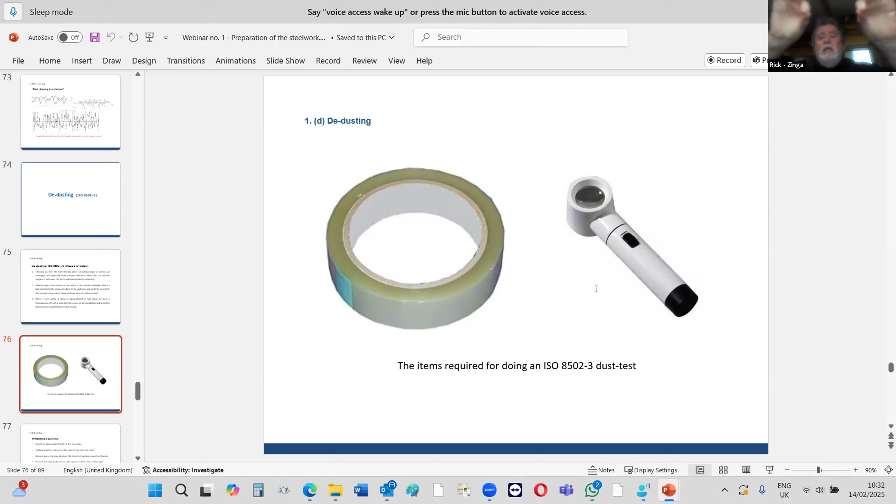If you can get the wider one, which is normally available in most countries, you get one that's 50 millimeters wide. Okay, and you basically tear off a strip, maybe 150 millimeters, put it onto your surface, and then rub it in with your hand. Okay, or the palm of your hand, rub it in, and then peel it off, and then you can see the dust, what's on there. So that's what's showing you here.

So when you remove the tape, you put it onto a backing card. So for example, if you're blasting with copper slag, your backing card would be white, because when you put your tape onto the card and then check it, you have a good contrast in color. If you're using things like aluminum oxide and those sort of abrasives, they're very, very light. So then you would use a black backing card to see what it is. And basically that's it. That is your card.

So when you put your tape on there, you hold your card up against this chart and put it side by side, and you can see visually if it's a grade 1, a grade 2, 3, 4, or 5. We always say grade 2 or below. I don't know why it's worded like that. They could have just said it's grade 1 or grade 2. That's it. But we accept grade 2 or below.

If you have grade 3 or grade 4 dusting with any coating, not only Zinga, if you spray it on, it's potentially going to stick more to the dust than to the metal. So you don't have a strong adhesion. So this is why you want to remove the dust. So you're sticking straight onto the steel itself. Okay, there's nothing in between. And yeah, so I'll just show you there.

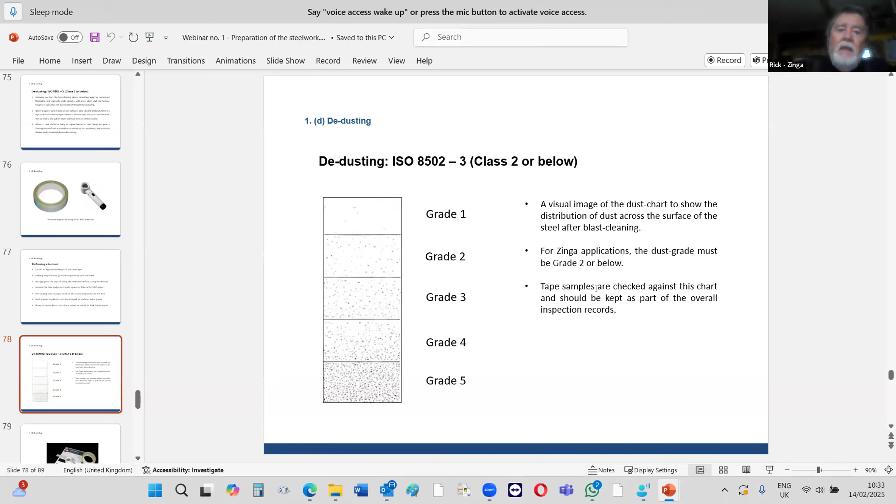There's your kit that you buy in a fancy little case. So you can buy your own sticky tape. I don't know what it would cost in India, but it'd probably be the equivalent of about €1.50 or something like that. You can have a torch if you want with a magnifying glass built in. A lot of guys don't bother. And then strips of black cardboard and white cardboard. You can buy that from any shop and just cut it into strips, say 50 millimeters wide, and have some black and some white on site.

So you can make up your kit, and you can conform to the ISO 8502-3. And to do that, it'll probably cost you, say, maximum 10 euros, and not buying a kit for 200 in a fancy box. And it's completely acceptable to any inspector. Okay, that's not an issue. And finally, we also want to discuss flash rusting before we discuss the Zinga itself.

Flash rusting is when you blast clean a surface and the humidity is quite high. Normally the critical humidity is about 60% humidity. And also if you're working near the coast, so if you're working in a harbor or in a coastal region, say within 5, 6, 7 kilometers of the sea, the atmosphere is normally very moist, so it'll flash rust.

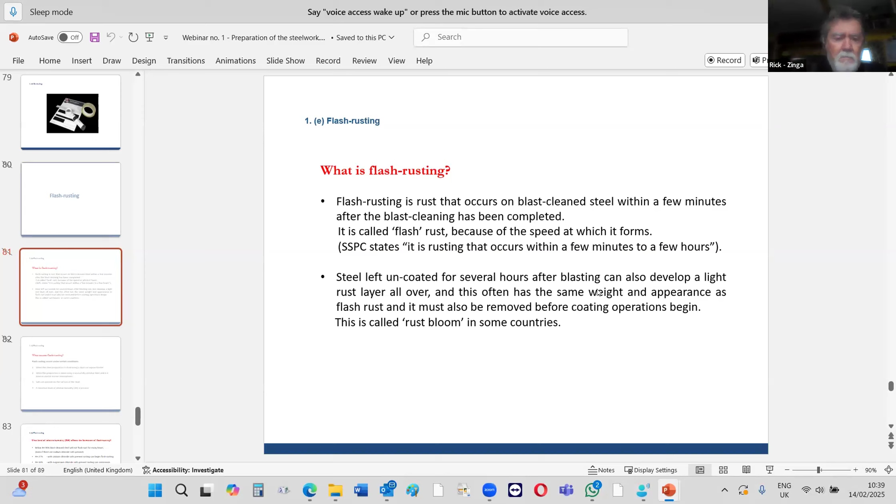So this is your dry abrasive blast. It concerns your humidities, as I said. Also with vapor blasters, if you're in a marine atmosphere, by the time it dries, it could start flash rusting. So vapor blast, and you get the zinc on within an hour, and then you'll have no problem at all. And I just wanted to show you, these are your different humidities. But I wanted to show you this. These are the official photographs, which are not very clear.

Light, moderate, and heavy flash rust. That's clear. And believe it or not, this system is used by the US Navy and by some other navies doing ships, because as you know, anything in the sea is more critical for coating. So you see the light, and the official method is you rub from right to left, then left to right, and then right to left again. That's the official test method.

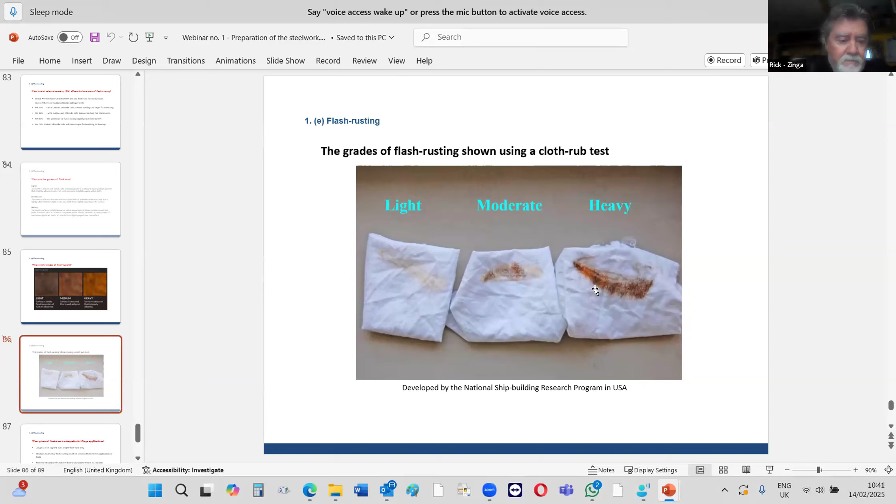So if you have moderate or heavy flash rust, it's either water jetting or reblasting. But light flash rust, you can apply Zinga. Interestingly, most paint companies do not allow you to apply paint because they'll fail. But because Zinga is a live coating, generating electrons into the steel, it's not a problem at all. So light flash rust is never an issue. Okay, I just told you all that.

Okay, this is just if you have access to chloride or the various chemicals. Many countries around the world, even in Europe, can't access these chemicals. So this is why it's always better to get the zinc on before sunset. We can't even get them in the UK, believe it or not.

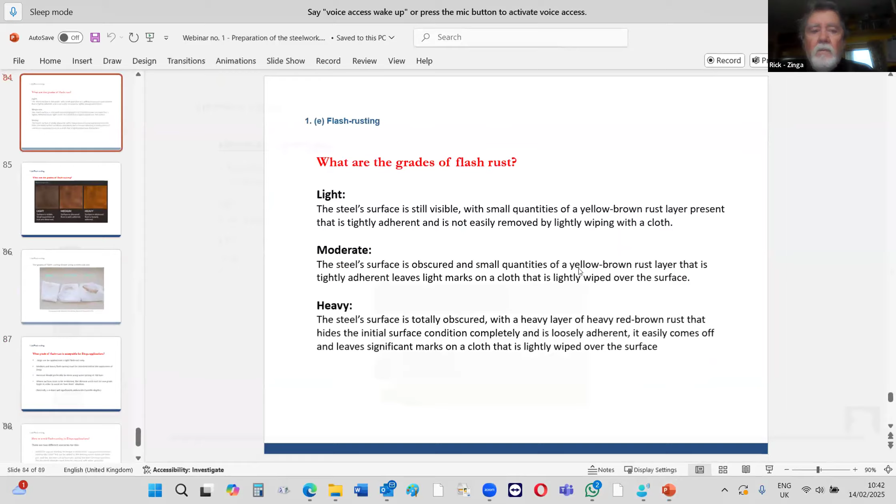Okay, where are we here? Hello. Yeah, you can have a tea. Sir, you need to continue again? Yes, we're going to continue. Hello, can you hear me? Take a short break, you can have a tea, sir. Okay. Want a short break? Okay, yeah, thank you. 5 minutes. Yes, sir. I'll just load the next one in. Is it gone? Where's it gone now? I've lost my screen thing now. Damn it.

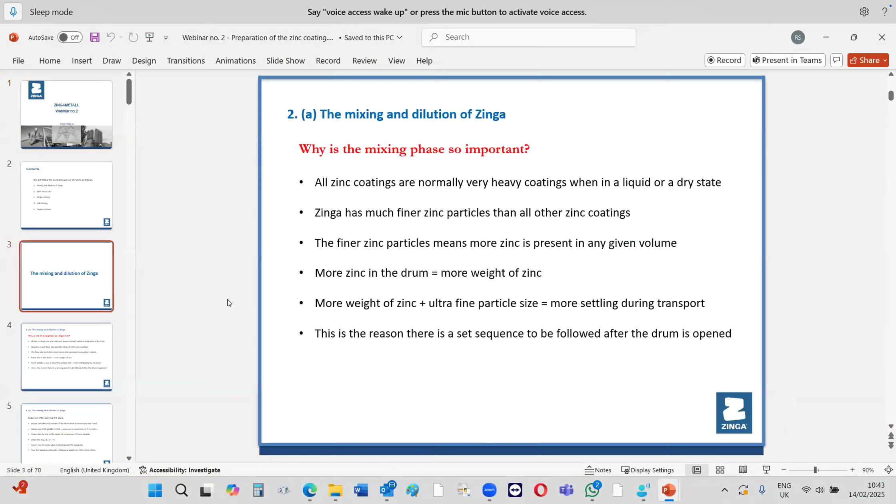So you need to take a break for 5 minutes? No, I'm just trying to load the next one up so I can continue. I thought you wanted a 5 minute break. Yes, yes. Or you need to continue right now? Is this too long or too short? How long will it take to continue, sir? If I can get this thing to load, I'm struggling a bit. We can continue immediately. You can just continue then. Okay, is everyone ready? Thank you, Vina. I've just got to get this thing to load.

Vijay, sir, you need to speak to something? Hello? Is there somebody who knows how I can get this up again? You can continue, sir. I can't find this thing at the bottom. It has disappeared. How to reload this? You just press the mic, sir, to activate voice access. Can you hear me? I can hear you, Vina. So you can continue your training then. Yeah, I'm trying to load this next part, but it won't load because the bottom of the screen hasn't got the little screens where you click. Can you share the screen, sir? Just click on the right side of your screen and share the screen. Sharing. Okay. Got it?

I think it says it's uploading the presentation. Just a moment. It says we're unable to share right now. Okay, now what to do? Shall we continue on Monday, sir? Is it okay with you? If you are running out of time, we can continue on Monday. That's fine. Let me know the timing, sir. The same timing on Monday? If you want, yeah, we can do that. Is your screen working right now? My screen's working, but I can't show it to you. Normally the bottom of the screen's got a little TV screen. I click on that and it opens immediately. But that's not on my screen at the bottom.

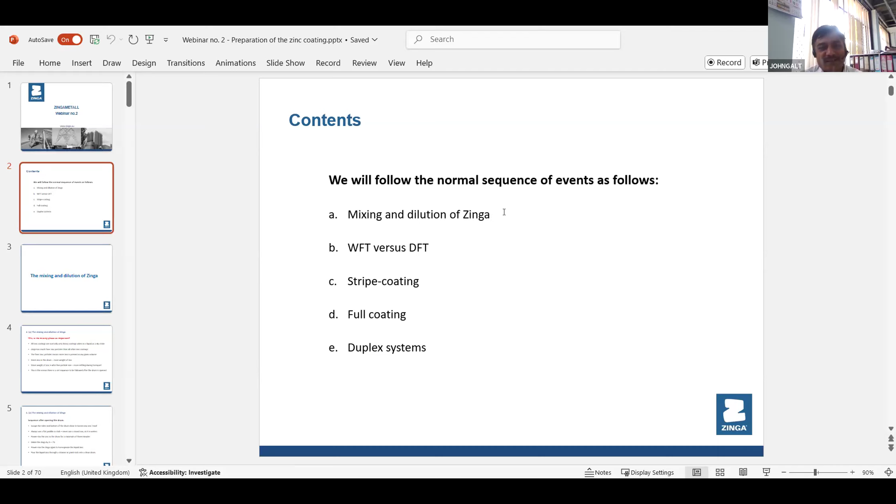Still nothing? No, sir. Is this problem created while sharing the screen, sir? You still can't see that? No, this is the webinar, Zingametall, webinar number 2, no? That's it, Meena. So you can see? Yes, sir, we can see. I can see page number 2. Okay, then that's fine, you can carry on with the presentation, sir. Thank you, Veena. Sorry, guys. This modern technology, it's got a lot of my old brain. It's fine, sir. Thank you.

Okay, so this is just a few topics we'll cover quickly for you: how to mix it, dilution, your wet film versus dry film thickness, stripe coating, full coating. So it'll be quite quick. First we do mixing and dilution. All zinc coatings are very heavy in the liquid state, so when you pick up the drum, you feel it's very, very heavy.

The zinc particles in Zinga are much smaller than the zinc particles you find in paint. This is why in very small gaps, the Zinga will go right inside and gain access. That's why when you're coating over rust, it goes inside the rust, because the particles are so small. And because there's more particles in, for example, a 1 gallon tin, 5 liters, it's 2.7 times the weight of paint. That's how much zinc is inside there, and that's why we have such a good voltage of electrons flowing from the zinc.

So the first thing we do with any container: when you remove the lid from a Zinga container, you don't have that rim, which is a real pain, you know. When you take off the lid, the tin is smooth and then it curves out. So you put in a stick to scrape the sides, because the zinc might be sticking a bit to the sides. You just scrape it around like that first. And then you can mix it with a drilling machine with a propeller and power mix it very quickly.

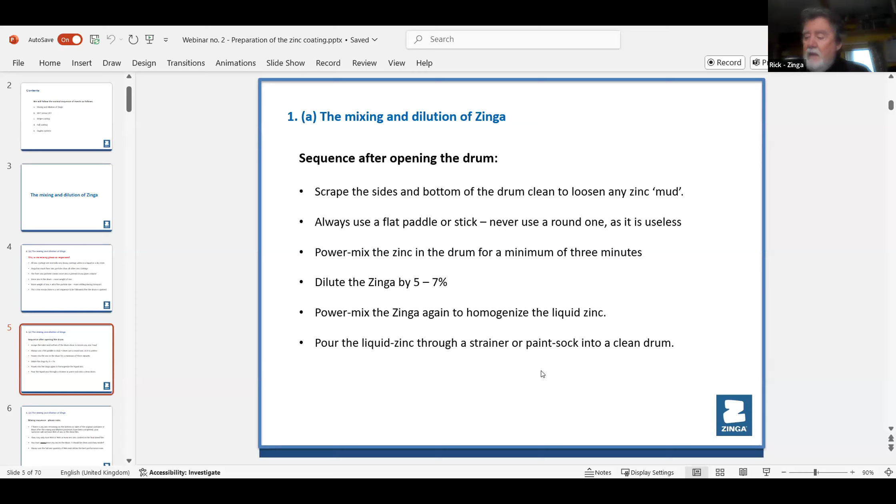Normally for brushing or spraying, we say you dilute by 5 to 7%. For example, if you have a 5 kilo tin, you'd put in 1 coffee cup of solvent. That's about 5%. Very easy to mix in then. Then you power mix for a few minutes, pour it through a strainer, and you can spray it. It'll come out smooth as glass. In some countries, we have people who redo old classic cars, and when they dilute Zinga 15-20% and spray onto the car body after blasting, it's literally as smooth as glass. So the straining is a very good idea.

On big industrial projects, if you're using the 10 kilogram or the 25 kilogram, when you're scraping, also scrape the bottom of the drum, because some people leave 5-10% of the zinc in the bottom of the drum. So scrape the sides first, then pull it across and scrape the bottom, then power mix, and it lifts everything up. Then when you put the solvent in and power mix, it'll incorporate it so you don't waste any of the zinc.

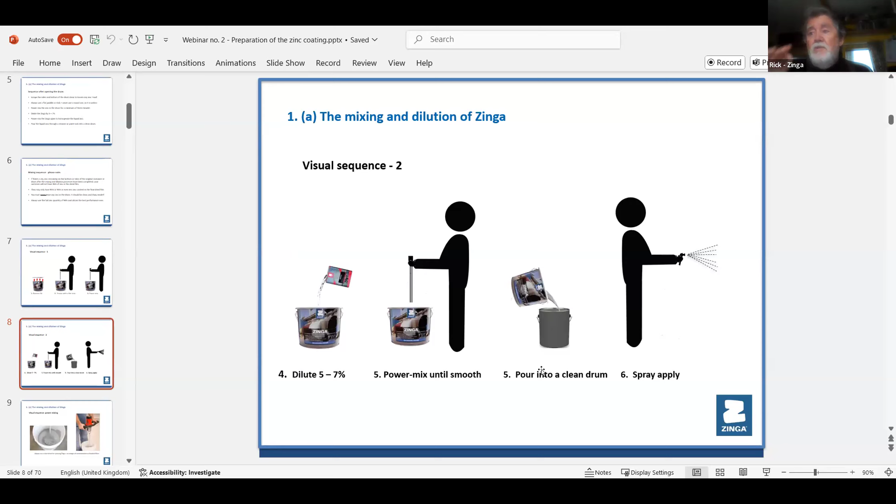This is what we send out in some countries. You remove the lid, you scrape it, you power mix, dilute by 5%, mix it again, then pour it into a clean drum, and then you spray. If you're spraying a ship or a bridge or something big, it's nice to pour it into a clean drum through a strainer. Then you know everything in that drum is spotless, with no dust in it. That's the only reason. Some guys don't bother, but we recommend it on big jobs, so there's no blockages and you can spray all day long with no problems.

So we have some people who don't have the electronic gauge to measure the dry film after it's been applied. Many people around the world don't have those. They're either too expensive, or they get broken, or they're just not available. So if you know how thick to apply it wet, you know how thick it's going to be dried. And that's all you need to do. It's as simple as that.

Okay. So on the sheets, if you ask us for a specification for a certain job, we'll compile it and send it to you. And we always show the wet and dry film thicknesses for any project, okay? So if you don't have an electronic gauge to measure the dry thickness, you work with the same figures on the wet thickness, which is right next to it on the sheet. So everybody is covered. You don't have to worry about that.

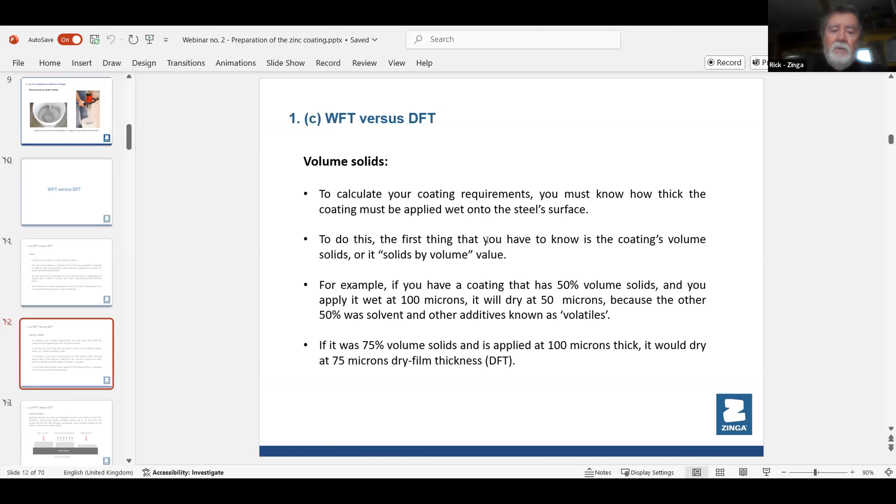And so this is how it works. Coatings are made up of pigment, binder, and solvent. That's all they have. That's the basics. Some have anti-foaming agents, leveling agents, and so on. But Zinga has none of that. It's just the zinc and the binder and a bit of solvent.

So here we have a little formula for you. To calculate the wet film thickness, you take the dry film thickness that you want to achieve, multiply by 100, and then divide it by the volume solids. So for example, on all these big sheets, they're going to be welded, so you only want 60 microns of Zinga. So you take 60 microns times 100, which equals 6,000, and then divide it by 58, which is the volume solids content in Zinga. You'll see this on your data sheet. Zinga's got 58% solids inside that wet film. And there it tells you 103 microns.

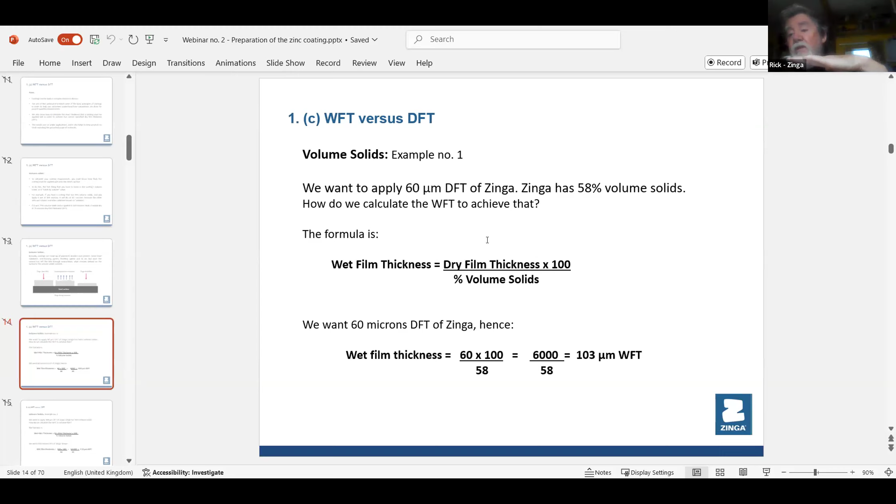So you look at your specification. If you're doing it near the sea, 120 microns is a standard system for coastal. If you calculate it, it'll come out roughly 210 microns. It's as simple as that. And that will dry at 120. So it's very easy to calculate.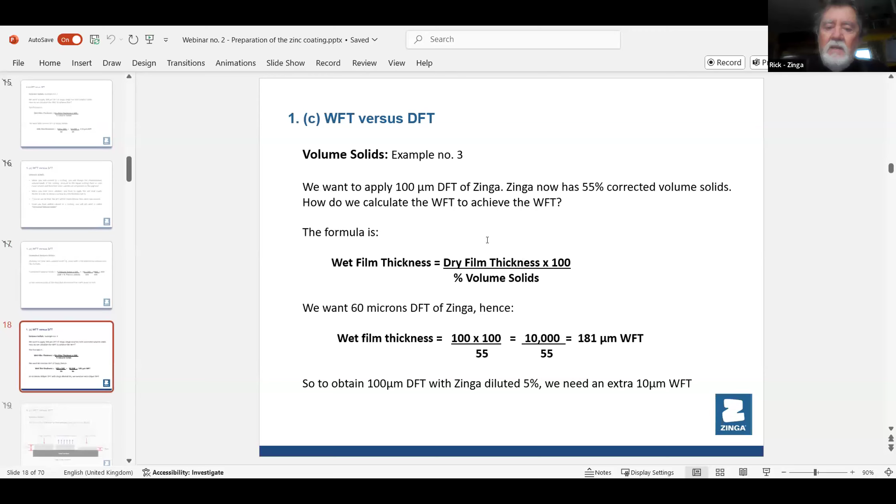Okay. Sometimes when you add your solids, you have corrected volume solids, but this complicates matters. So I won't cover that part because it really doesn't apply normally. Just stick with this. This is the basic one. So yeah, multiply by 100 and divide by 55. It's as simple as that. That's right.

Okay, if you reread this on your recording, if you have anything you don't understand on this, please let us know, and we'll write it out in more depth if you want. It's not a problem. We want you guys to be happy, and you have to be clear in your head. You must be satisfied that you know all these things, and then you can give it to your customer. So we're here for you.

Requirements for good coating. Good correct mixing with the power mixer propeller. Okay, some people stir it with a stick. For small amounts you can, but when you get bigger and bigger, always use the mixing blade you get from the hardware shop. And then dilution.

Okay, some guys don't dilute, and then it can be a little bit thick. And if it dries fast on a certain day, you might have a slight unevenness. If the customer wants it dead smooth, then he might moan at you. I mean, you're still fully protected for 35 years, but dilution can be important for brushing, rolling, and spraying. You know, use 5 to 7%. We recommend good gun control.

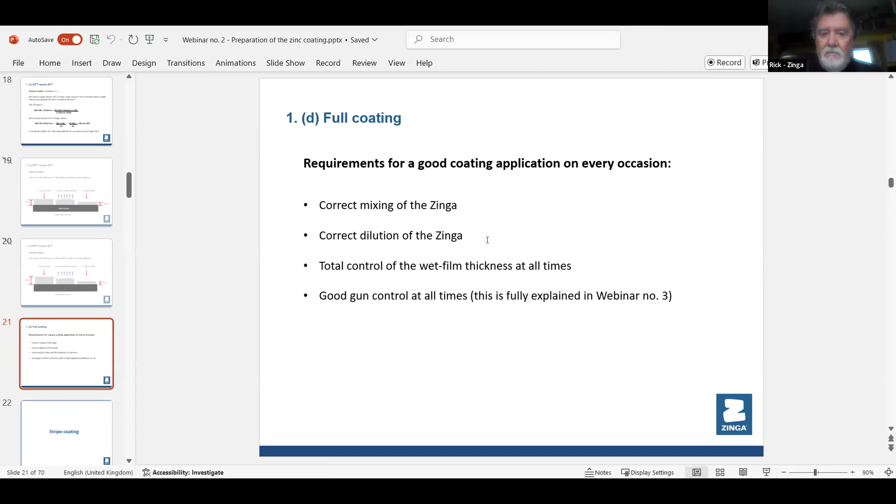So after blast cleaning, the first thing we always do is stripe coating, okay? All liquids have surface tension. So as they're drying, they're always pulling at the surface and they shrink a bit. That's why we said on sharp corners, they pull away. Okay, so stripe coating, for many decades in the coating industry, was underrated and neglected.

And in America, on many bridges, the paint company said, okay, this will last you 30 years before you have to reblast and repaint. And sometimes after only 18 years, they were seeing rust appearing. And the experts went to inspect and said, the rust is appearing on sharp edges and over welds. The rest of the bridge was fine. And that's when they introduced stripe coating as an official part of coatings.

And America, that country is crazy, you know, they want to sue everybody for everything. So if your painting breaks down 10 years earlier, they want to sue you and then you have to repaint the whole bridge. And nowadays in America, for example, in Minneapolis, they had a triple arch bridge that they blast cleaned, and to blast it and paint it cost $12 million. Great, sir.

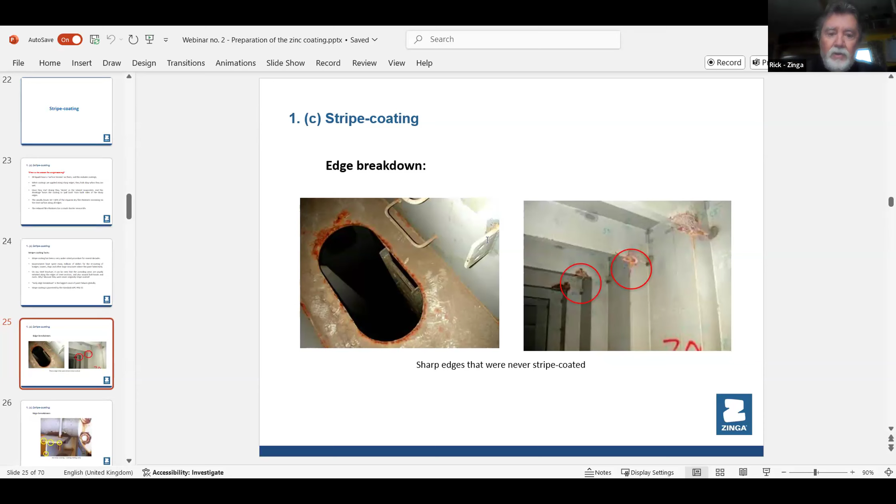You can walk into any ship that's maybe 10 years old, and you'll see this on all the access hatches immediately. And I'm talking any ship anywhere in the world, you see these things because they were not stripe coated originally. These edges, even on a pipe support inside an oil refinery, they had edge breakdown there. And of course, that pipe you can see, that pipe had crevice corrosion because you have two metallic surfaces close together. Overnight condensation was sitting on the flat part, and it was going inside that joint, and it was corroding the two surfaces.

So if that was blast cleaned, you would stripe coat the edges that have been ringed off there where it's rusting, but you would also stripe coat inside that crevice joint. So you would not see that crevice corrosion taking place at all. And as you know, you've seen it on cars, and in Africa, my God, there's thousands of cars like that, especially in Durban, because of the high temperatures, the high humidity. So nobody is exempt. There's bridges all over the world, always on the edges because they didn't stripe coat it.

And unless you show people this, they don't realize the importance. They think it's just another pain in the ass job to complete the job. But a critical part of any coating process is stripe coating. And as Obe said, these are always done with a brush. So you get a nice thing. You can go along it like that. Some guys do it that way. But if you do it vertically, you're actually getting a nice build all the way around on these things. So it is so important.

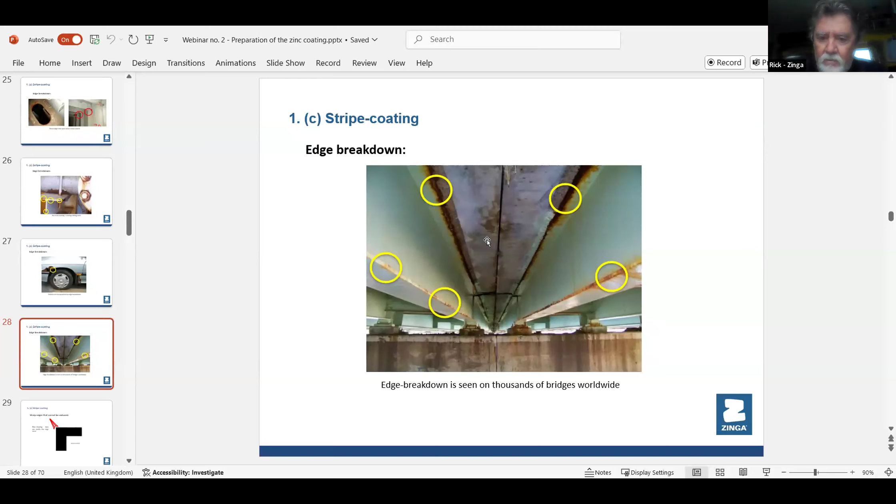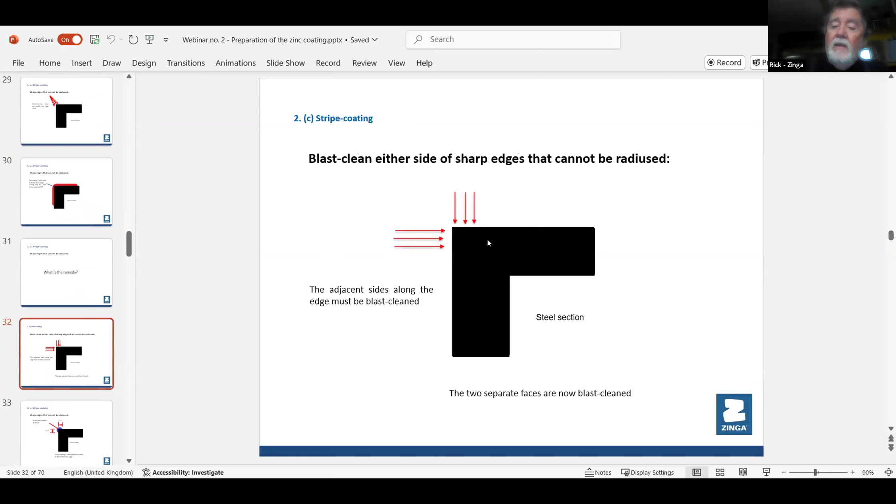And again, the blast cleaning. This is showing you where you cannot radius because it's a bridge or inside a processing plant, and you cannot get access to blast that edge. So we covered this earlier. If you can blast either side of it, and in some cases you might have to grind with a 36 grit sanding disc, but if you can do either side of that sharp edge, and then put your stripe coat on, you can still stripe coat it, and that area becomes protected when you put on the full coat. So there's the full coat. So that's fully protected. So stripe coating in every aspect.

This is a job that I was working on in Togo in West Africa. Up in that month it was 35, 38 degrees, and the humidity was 80, 90%. But I had the team, I helped them, and I said every single plate. This was a railway bridge, and these plates, all the old crisscross channel irons, they were all corroded, 50 years old, all being replaced. And so there was more than 300 of all these. Each of these panels was hundreds.

Every single one was stripe coated, and then the next day the guy came with a spray gun and just sprayed on the full coat and covered them. So instead of doing them individually, you put them together, and he sprayed like 10 at a time, so it was quite fast. And when you spray them, you can also brush and roll the coating on. As long as it overlaps the stripe coating, then you have an unbroken film of galvanizing over the entire surface. So there's no weak areas at all.

There's no thin areas. Everything's thick and solid all the way around. So each one of those panels was fully galvanized. And we said to the bridge owners, this will be there for the next 30, 40 years, easy, because of that.

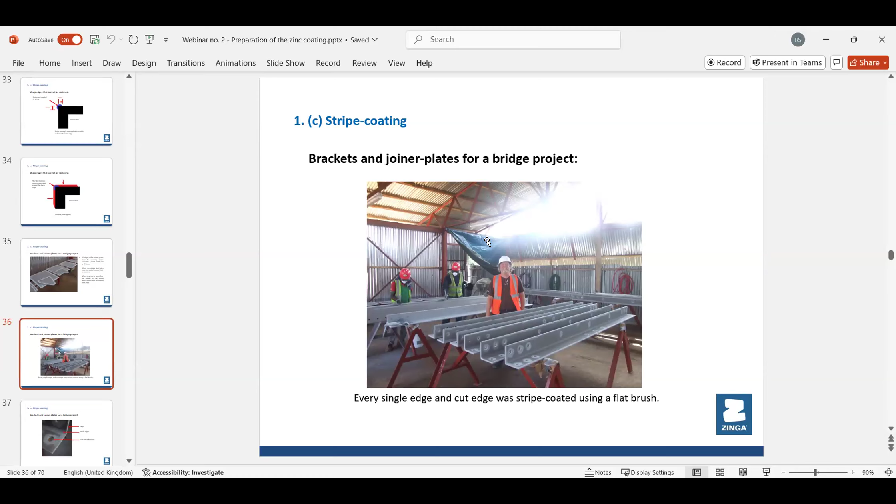Then when they sprayed again, we overlapped all of the holes and all the edges. So that's showing you a hole there. It's as simple as that. And then when they're sprayed, everything's coated. So that's your stripe coating. Always be done by brush, unless we state you can use the gun on big beams. Always run parallel to the edge.

Crevice joints must be back brushed. So that means you're brushing one way and then pushing against it. That's back brushing. So you're cutting it that way and then back brushing it, pushing it inside the joint, and you'll never ever have rust coming out of that joint for years and years.

With stripe coating, we say along edges and around holes, try and give it a width of about 20, 30 millimeters, okay? It's not critical, but it's just a good guide. So when you're spraying, you know you're going to overlap those areas. So all holes and edges are very, very well protected.

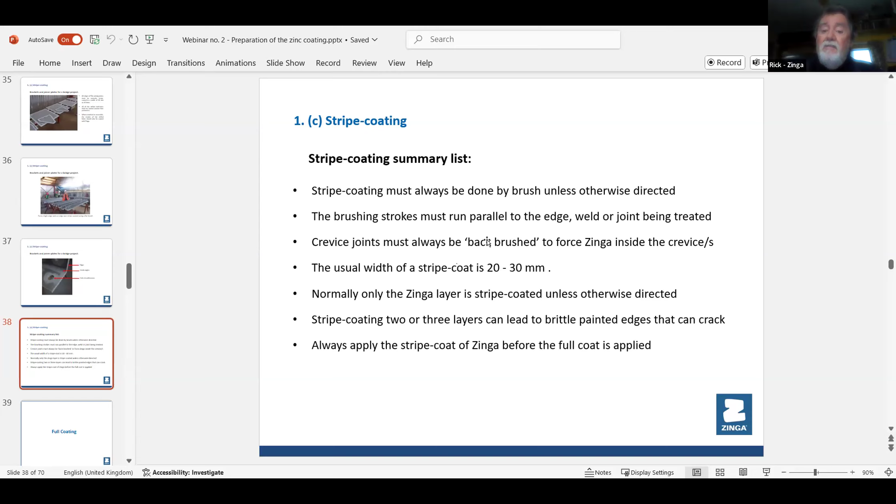And then, yeah, the full coating, again, your dilution can change how the coating dries, how thick it dries, how thin, how fast, and so on. The painter must apply the wet film thickness as shown in the spec. So again, he knows how thick it will be when it dries.

Very heavy layers can produce little blowholes. So while it's still wet, you see little bubbles because you put it on far too heavy. It happens occasionally, but the bubbles eventually will pop and they'll shrink down. So you haven't compromised the durability, okay? You still have the full protection. But if a customer sees it, he might get a fright.

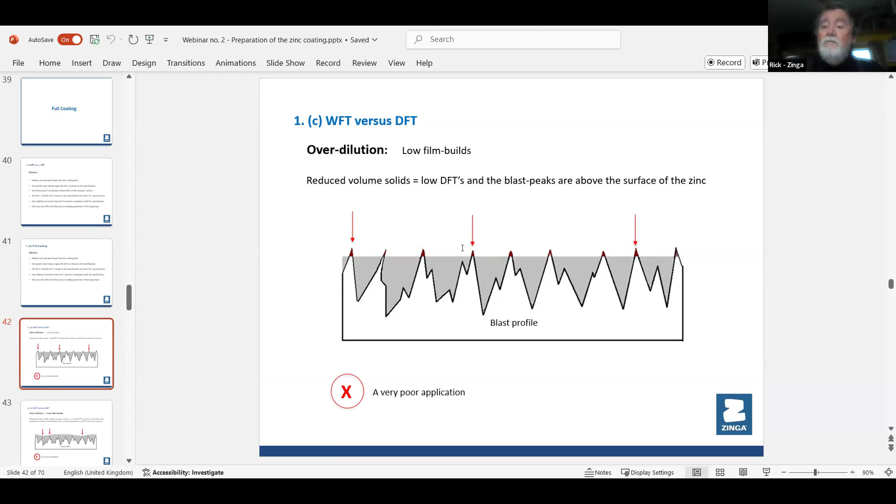So in that situation, give it another 2 passes of the gun. That's all. If you're near the sea, you might have to wash it down first. But inland, not a problem. Just give it a couple of passes of the gun or a roller or a brush. Just give it 2 passes and see how it looks. And if it's thick enough, you can leave it. If it's near the coast, you might have to give it 1 or 2 passes, let it dry, give it another 1 or 2 passes. That's it, finished. So either way, you've retained the durability of the system.

This is also over dilution. So when you're spraying, instead of saying 5 to 7%, we've seen this occasionally when a guy's put maybe 10, 12% because he didn't measure it properly. And some guys said, oh, we don't have an accurate measuring jug.

I said, you know, in Africa, when they have a big drum of Zinga and they haven't got a jug, they use a liter bottle, which used to hold Coca-Cola or something, and they fill that with solvent. That's 1 liter. So now they can calculate how much is 500 cc's according to how much zinc they got in the drum. So there's always a way to do it. You don't have to have laboratory equipment for accuracy.

So here it is over diluted. So when they sprayed and it started drying very fast because it was 35 degrees, you can see here some areas are deeper than others. So if you measure that with an electronic gauge, your readings are going to be all over the place.

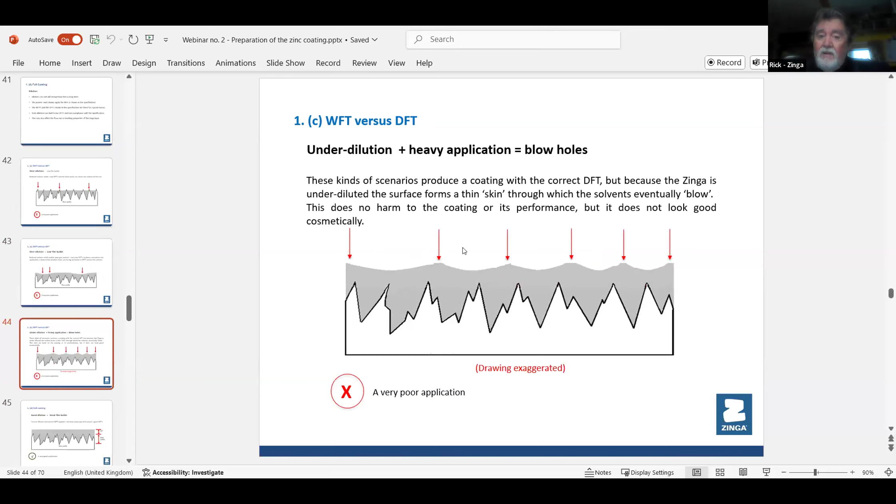And that's also under dilution. So when you're spraying, sometimes where your passes overlap, you might have little high spots. Yeah, this has been exaggerated. It wouldn't be as bad as that, but it just shows little high spots. It's not serious, but again, some customers want a completely flat surface. They'll be very fussy.

Quality control, okay, that's the painter. And again, I'm going to show you these are the gauges, okay? And this is how you check it with a wet film gauge or a paint comb. If you haven't got one, ask Abe for one, or he can give you 2 or 3. If he hasn't got, we have it in the factory. You have? Okay, perfect.

So this is how they look. Okay, you get an Elcometer, you can get the other ones, but these are like 65, 70 euros for some of these ones you buy online. They're very expensive, and ours is free. It does the same job. Okay, so on your wet film comb, the way they're made, your corners are always level. So when you stand it on the surface of the steel, that's how they look. And you'll see each tooth get shorter and shorter as the wet film gets thicker and thicker.

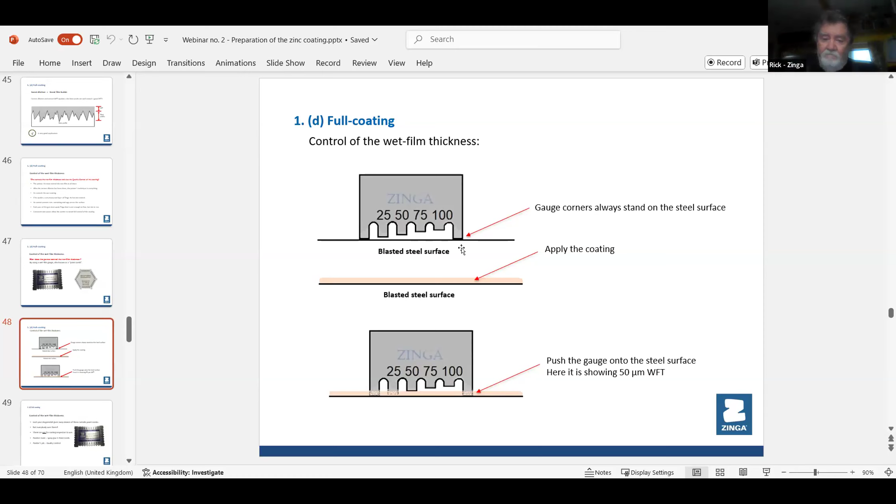So a painter who's in charge of quality control, in his hand he should have a spray gun, and the left hand should have a paint comb. Okay, that's it. When I see painters and I say, how thick is that coating? And he's thinking. I said, your left hand is empty. He said, yes. I said, where's your comb? How can you tell me that you know the wet film thickness when you're spraying that big beam? You should be doing 2 passes.

If you're starting the job, you do 2 passes, measure, okay, clean it, measure again, measure again. If it looks okay, 2 passes. The entire beam is 2 passes. But if you measure 2 or 3 measurements and it's a bit low, give it 1 more pass of the gun, measure again. It looks okay. Okay. The entire beam gets 3 passes of the gun. That's how you use a wet film gauge.

So whether it's a beam or a big surface of a boat or something, always do your first 2 or 3 passes and measure. Then, if you want, he can put it in his pocket and carry on spraying. But every now and again, he should just take a test reading just to make sure that he's staying on track with the whole beam. So these are used to great extent, okay? And painters should always have one. It should be in his hand. If it's not, it should be in his pocket so he can take it out and do a quick check. So the painter has no excuse. His tools of trade are the spray gun and the comb. So that's it. He should always do a good job.

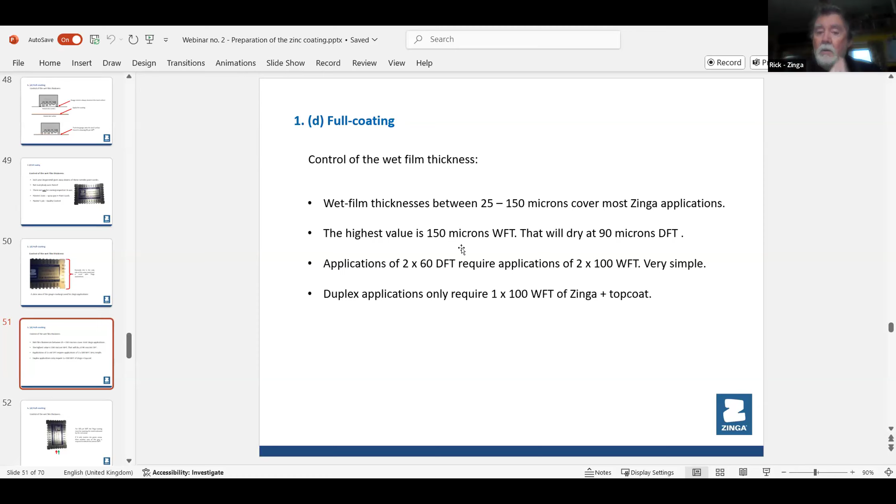Hey, Rick, just wanted to tell you, we told them till 5 o'clock, so that's like 6 minutes from now. And I'm sure there's lots more to cover. So should we plan today to end it in 6 to 8 minutes? Yes, yeah, sorry. I forgot about the time. Okay. Thanks.

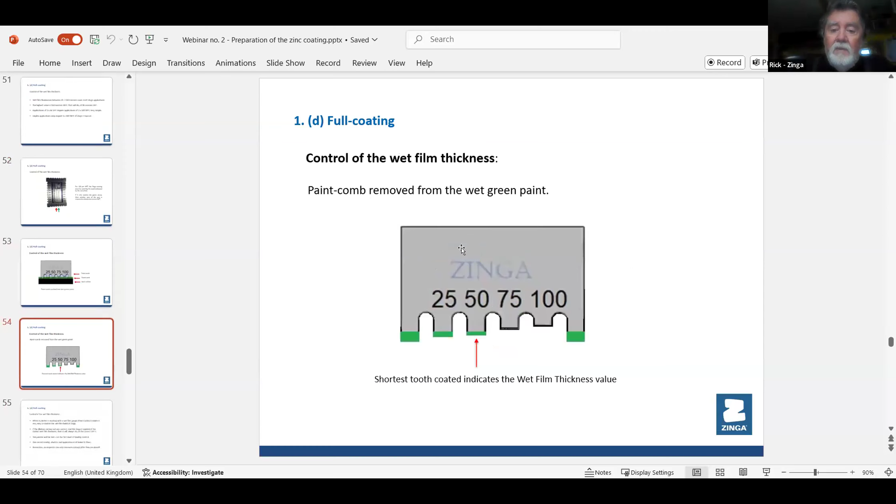But what I'll just quickly say here, when you're checking with this, it varies from company to company, okay? Because some guys will do a pass and their painter has got a very fast hand. So he might do one pass and check it again and it's still too low. Whereas in another company, the painter does one slow pass and he measures, okay, that's perfect. So where you measure 75, some guys might take 2 passes to get to 100, and others take 1 pass. That's why you test, you check it. Okay. It's control, and then duplex again. Duplex just means 2 or double.

So basically, you put the Zinga on. If they want some color over the galvanizing, you can also put a thin primer, or you go straight on with the polyurethane, a 2 component. Put on a very, very light coat. 15, 20 minutes. Give it a second very light coat. The job's done. That's it. Finish. So you can galvanize and put color in a single morning, not a single day, single morning.

So what happens with the duplex when you're spraying paint over Zinga? Your first coat is very light. You go off, have a cup of tea, come back after 15 minutes and look. If you look down at it, it should be completely matte. That means that the zinc has sucked all the coating into its porosities. That's why you do this, because all zincs are porous. All zincs have little porosities. So you put a very light coat, it gets sucked in, it's completely matte. That indicates that it's dry, now ready for the second coat.

If you apply the second coat, also nice and light, it'll sit up and dry with a high gloss. You get a perfect finish. When you put the first coat and it's all matte, if there's a couple of shiny bits, give it another 10 minutes. That's all. Then come back, it'll be matte. Then apply your second light coating, because most polyurethanes go on at 60 to 80 microns anyway. So your second light coat, it'll always sit up nice and give you a nice shiny finish, and that's it. The job's done. So that's basically your duplex. That's just showing you the layers and all that. So that's basically it.